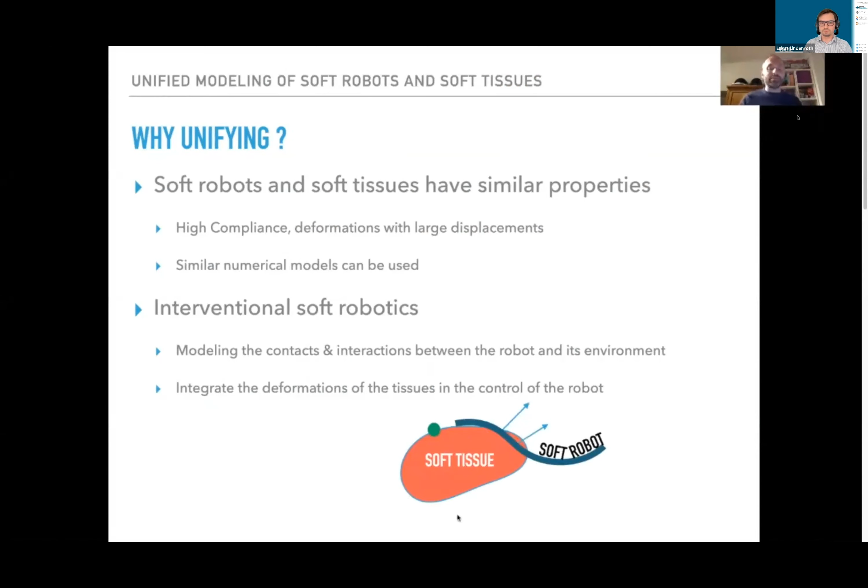So why unify models of soft robots and soft tissues? In fact, they have similar properties: high compliance, deformation with large displacement, and similar numerical models can be used. In interventional soft robotics, we would like to model and interact, to have a model of contact and interaction between the robot and its environment. When we want to drive a robot inside a soft environment, particularly when it interacts with soft tissue, imagine we have a target on these soft tissues. We may have some contact with these soft tissues, so we need to integrate the model of deformation of soft tissues into the model of the soft robot.

My background also reflects that unification. I've been working for several years on eye surgeries, on surgical simulation for training. For instance, here you see in this video the model of the eye made of a finite element model, and here you see more recent work on the inverse model of the soft robot, also made with this FEM model computed in real time.

So when we model soft bodies, for instance here we want to model the liver. The first part is to have a constitutive equation. We need to take some part of the soft tissue, do some tests to obtain the constitutive law, and create a numerical model. We often use in the team a FEM type of model. This FEM model will provide internal force.

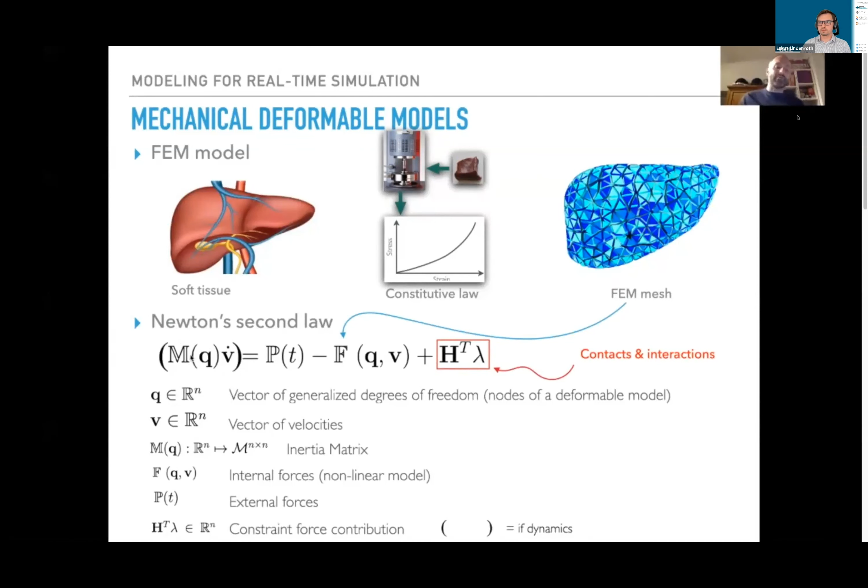We add also some constraint type equations, using Lagrange multipliers, to model contact and interaction. If we are considering dynamics, we need to add this part, which is the mass multiplied by the acceleration, and P is the known external force.

If you think of a soft robot now, it's the same kind of equations. You still need a constitutive equation. So for instance here we did some tests on silicone, and we also use a numerical model of the robot. We have the same thing, we compute the internal force, but for the constraint part, we can also use it to model the actuation, so cable or pressure.

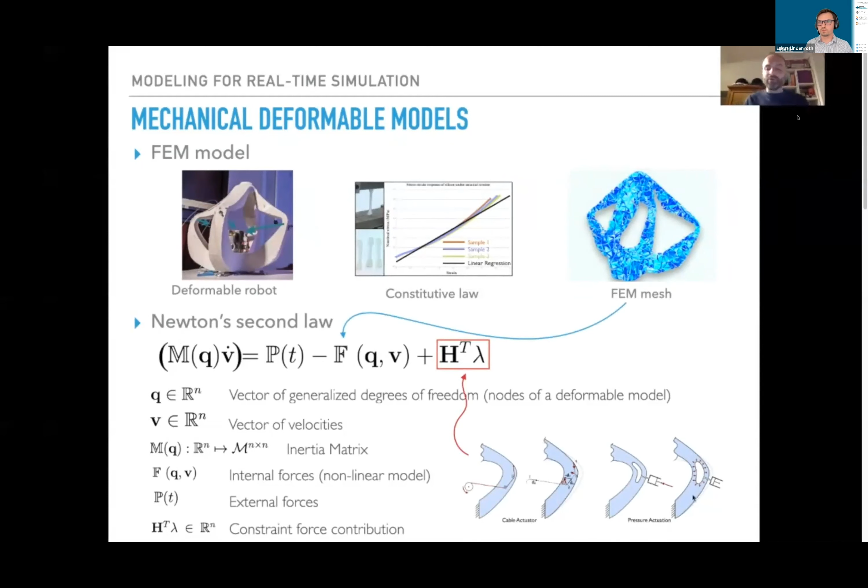For the time integration, we often use a time-stepping method to model, to be compatible with contact modeling. As you may know, at the time of contact the acceleration is not defined, so we prefer to use a lower order integration scheme, which uses the difference of velocity instead of acceleration.

And the time step is there, and here we use impulse instead of force. We perform one linearization per step. So here we have nonlinear deformations, and we have to linearize this deformation at every step of our simulation.

So what you have to recall for the following is this matrix system, AX equal to B. A is a known matrix, B is a known vector, and you have to invert the system to obtain X, the deformation, or the motion.

It's the same kind of equation in the dynamic equations or in the quasi-static case. And you have the constraints here and here that appear in the equations. This formulation is completely compatible with rigid body dynamics. Actually, this time-stepping scheme has been taken from a paper dedicated to rigid body dynamics.

So when we want to model interaction, we have to define the constraints. In the contact case we have two different constraints. Either we are in contact and the distance between the objects at the point of contact is zero, and then the force is positive. Or we have a non-null, positive distance between the two objects, and in that case the force is zero. That's why we say the Signorini law is a complementarity - there are two types of constraints.

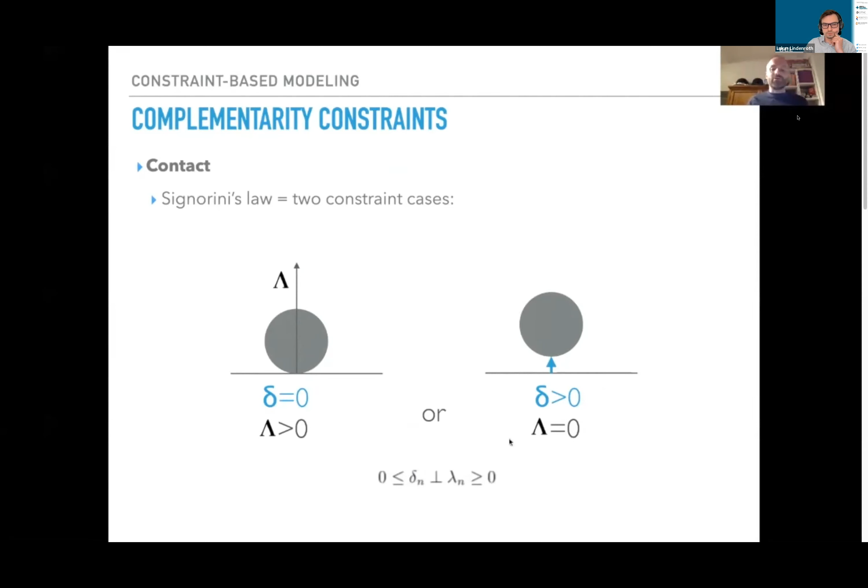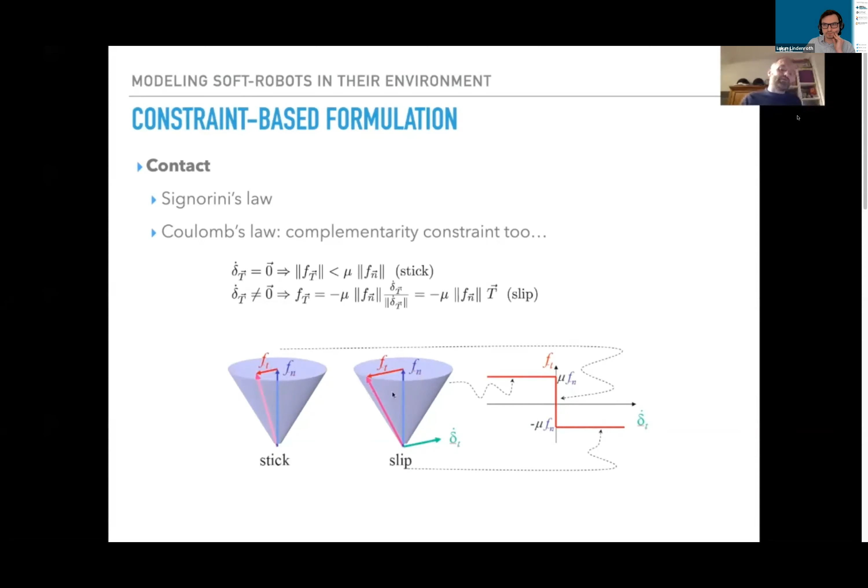Either it's one of these cases or the other. We have the same kind of formulation from the friction. So Coulomb's law is also a complementarity. We have two cases: either we are in the stick case, where we have no relative displacement between the two objects in the tangential direction, and in that case the tangential force is strictly inside the cone. In the slip case, we have a motion between the two objects, and the tangential force is strictly on the surface of the Coulomb's cone.

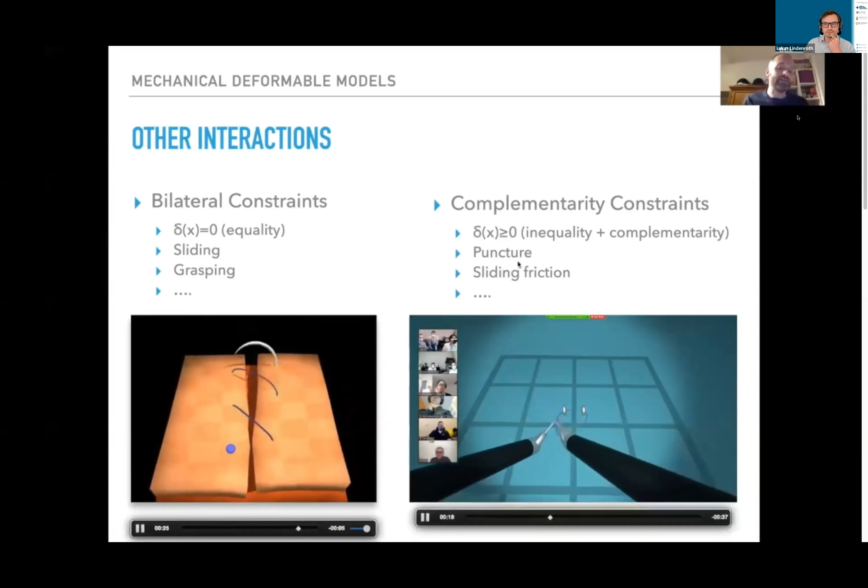With this type of constraints, we can extend the type of constraints to model more and more complex interactions. So we can use equality constraints to have sliding or compute grasping. We can add new complementarity constraints to model, for instance, puncture or sliding friction, which you also see in this video. And here you see a video of a knot that you do for suturing.

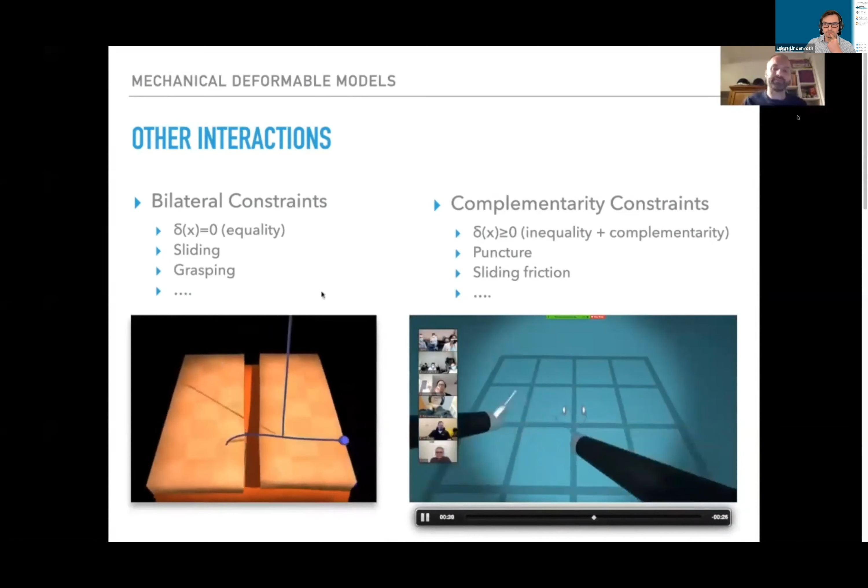So in our framework, what is important is that you have the behavior of the deformable bodies or robots, and you have the constraint law. In our framework, we have a way of constructing this matrix H for the Lagrange multiplier, and their role is to link what's happening at the level of the motion of the nodes and what's happening at the level of the constraint.

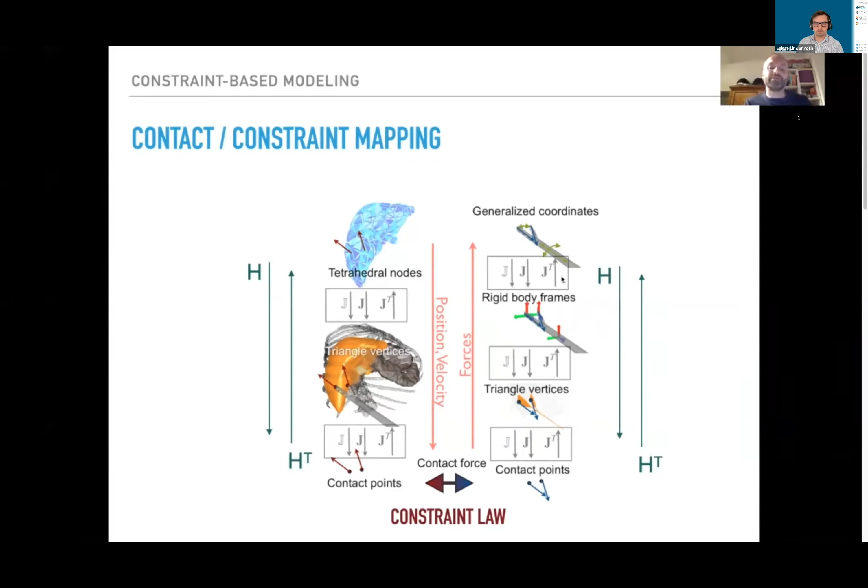So now, how do we handle these equations? Imagine you have a deformable robot in contact with a soft tissue. You have two deformable models for each of the two soft objects, and you have these Lagrange multipliers that we defined before.

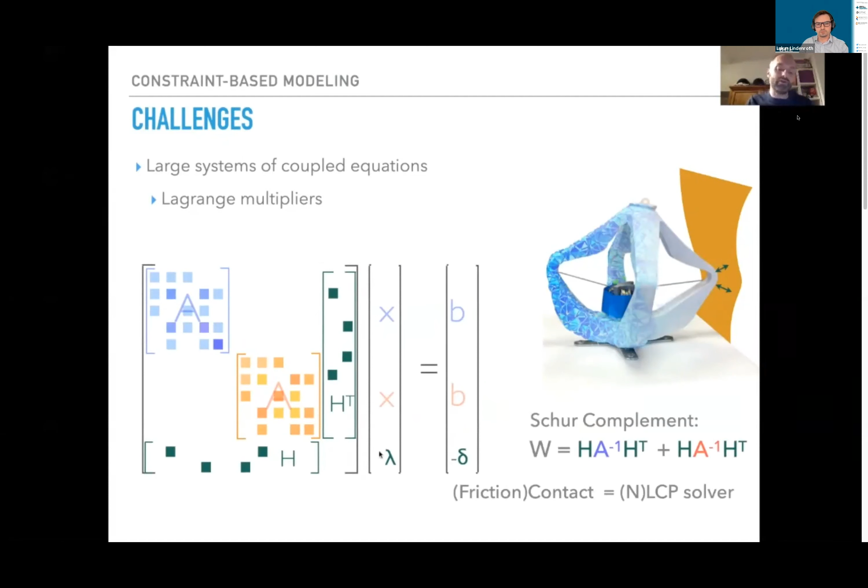Now what we will use in our tools is the Schur complement. The Schur complement of this matrix system allows us to compute the value of lambda, which is also something that is unknown. To understand what this Schur complement represents, I will give you the example of a soft table in contact with the floor.

In fact, W represents the mechanical coupling between the constraints. So in the table example, the four legs are decoupled, whereas here in this other case the legs are coupled. And what you will find when you compute this W matrix, this Schur complement, is a matrix that is like uncoupled, with a block diagonal structure.

So the size of this matrix is the number of contacts. Of course, if I have friction, I have 3 constraints per contact. So it will be, for instance, a 12 by 12 matrix, with 3 by 3 blocks that represent the contacts of the 4 legs. In that case, the 4 contacts are decoupled, whereas here the 4 friction contacts are coupled by the small coupling that we have between the legs.

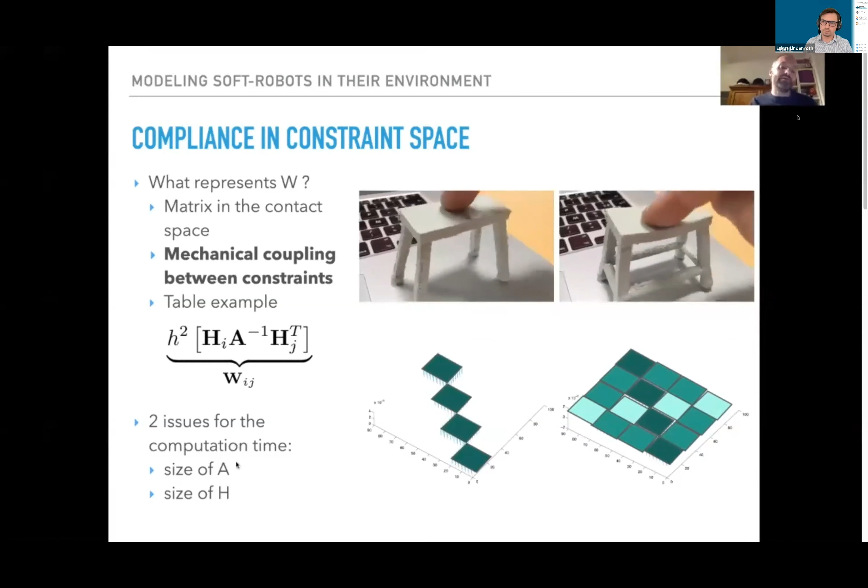And it's really important when you solve that, because in that case you will find that the solution is that we are in a slip case, as here we are in the stick case. There are 2 issues to compute this W matrix: the size of the A matrix, because we have to invert or pseudo-invert this matrix, and the size of H.

And now, what's happening when we want to control a robot with contact? So first, how do we control the robot?

Instead of using the contact here, I'm using another kind of constraint for the cable and for the effector. For the cable, imagine that you have a cable that goes through the structure. You can say that lambda is the pulling force, but as you know the pulling force, you know the distribution of the force on all the points on which the cable goes through. So you can create one constraint per cable. For instance, here we have a robot with 8 cables, so we will have 8 constraints.

And at the tip of the robot, we will define 3 complementarity constraints that represent the effector. So for these constraints, the H matrix is really simple. It's basically a matrix full of 0s, except at the nodes that are concerned, where you have the identity matrix on this node.

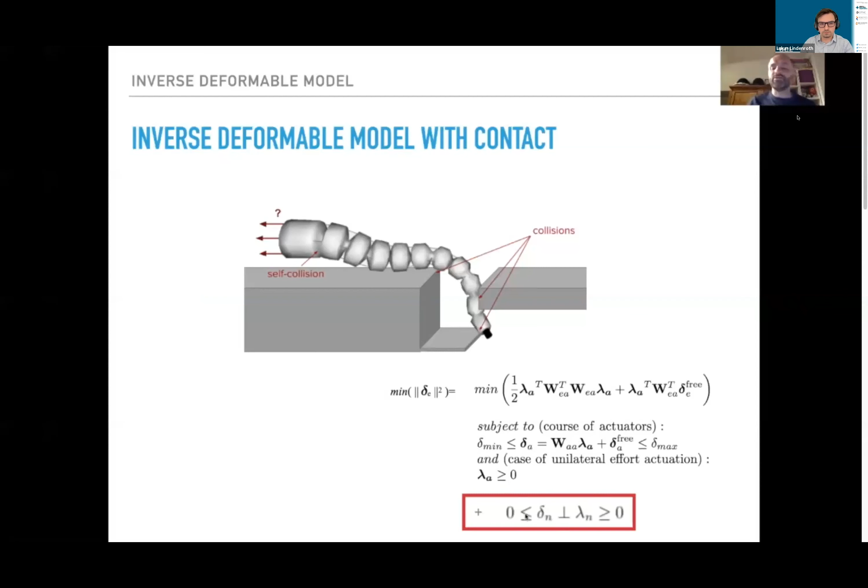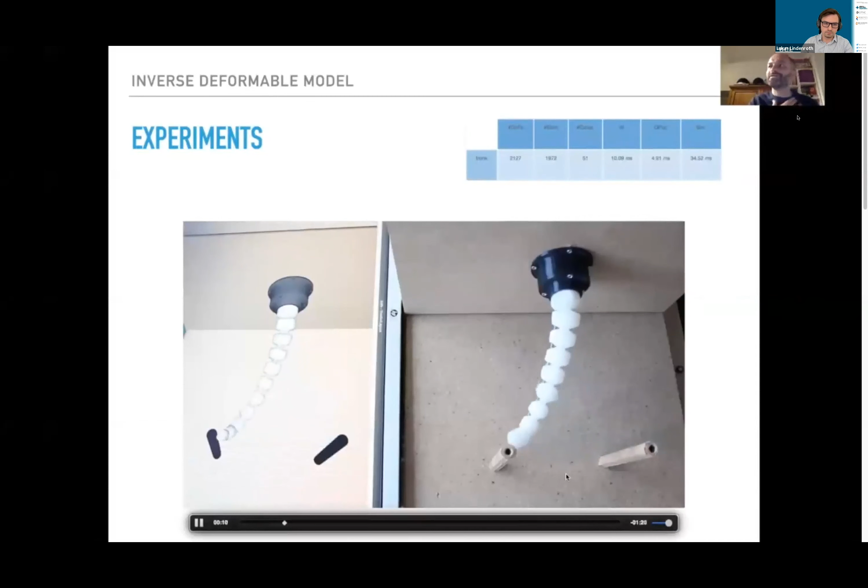And what we have done, which was a little bit more tricky, is to be able to inverse the model with contact. In that case, what was more difficult was to combine this inverse model with the complementarity constraints that are due to the contact. But we ended up with a solution where we were able to have the solver solve a QPCC, a quadratic problem with complementarity constraints.

In this example, you see that if we do not model the obstacle in the inverse problem, we have a difference between the position, so what should be the inverse model of the robot versus what happens in practice. But if we are able to track the obstacle and model its behavior, we will be able to integrate the contact in the inverse model. That's what we do here.

Here we model the obstacle in the simulation. You see that computed contacts are found between the robot and the obstacle, and we are able to change the control of the robot, to adapt the inverse model, to really reach the target here, even if there are some contacts.

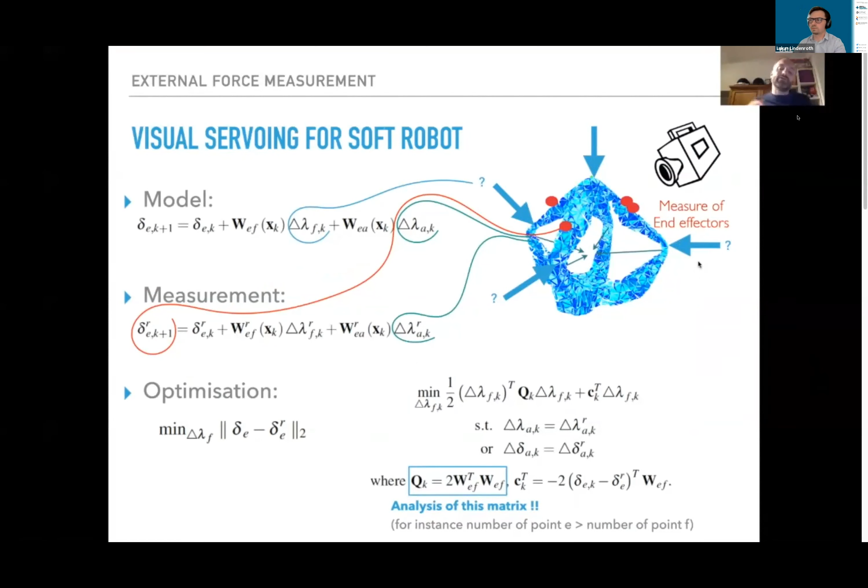We can use this also to do some contact force measurement. So if we imagine having a camera measuring the position of this point, we can also use this inverse problem thanks to the measurement we are doing. In that case, we can add new constraints for the force that could be applied on the robot, and basically the inverse problem finds the external force we are applying on the robot.

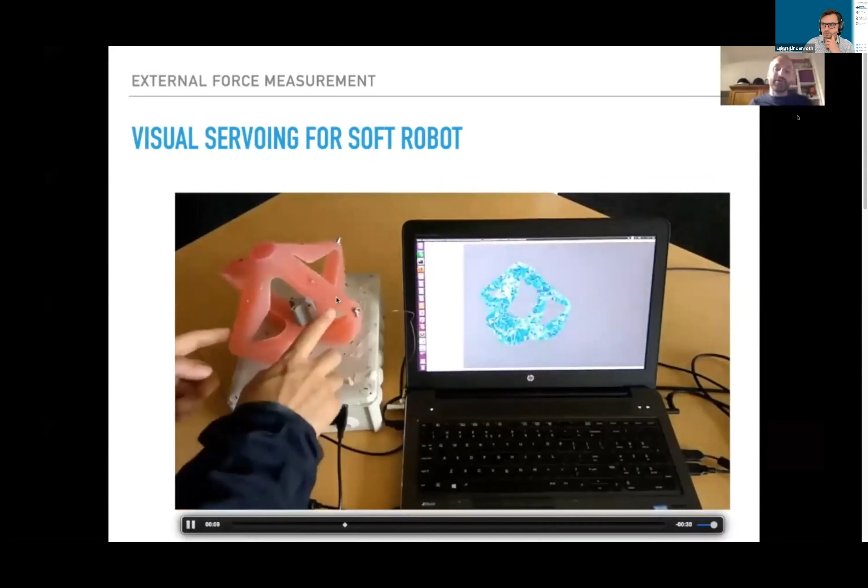So the same kind of equations. When we push on the robot, we see that we can also inverse the problem and find the force that is applied on the robot.

We have combined that with other types of sensors. For instance, here we are using a capacitive sensor to find where the user is pushing on the touchpad. We can use also this capacitive sensor on the soft finger here. You cannot see them, but they are placed on the finger, and with the capacitive sensor, we know where the user is applying force.

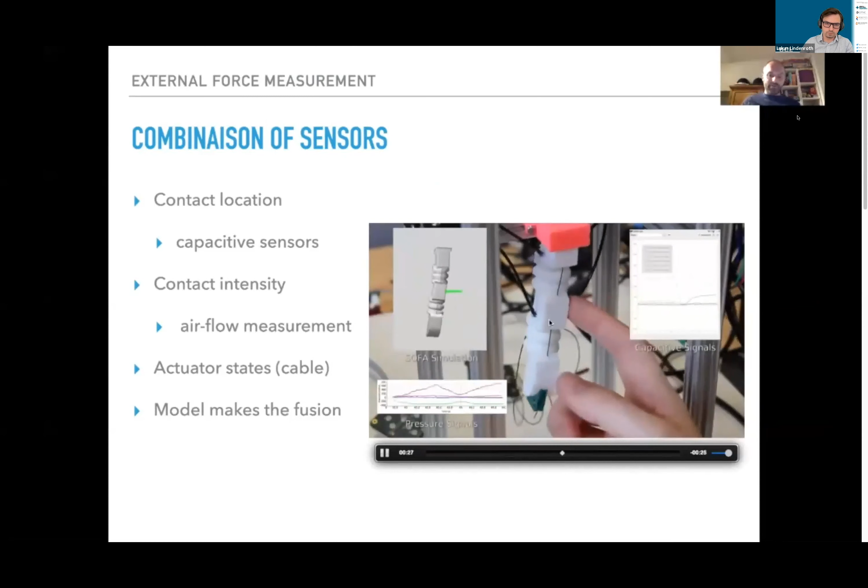And we have also pressure air measurement. In that case, there is no control with camera, etc. It's only based on airflow measurement, not pressure, plus capacitive sensor. And we integrate that with the model to find the force that is applied on the robot.

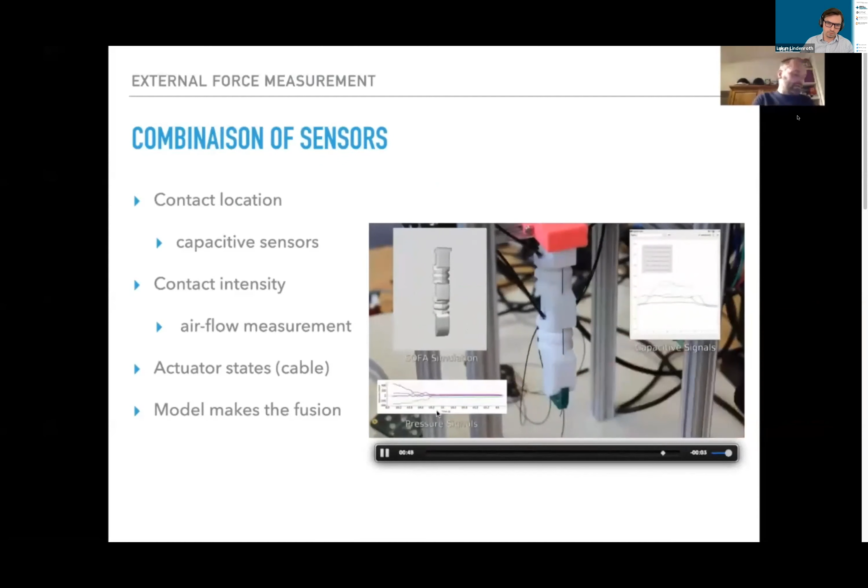So we can transform the robot and make it act as a force sensor.

An example of application mixing this soft robot and soft tissue models is the Bartolo project that we do in collaboration with Ficuciello. It's a robotized prostate biopsy. We have soft tissue that are modeled based on the MRI.

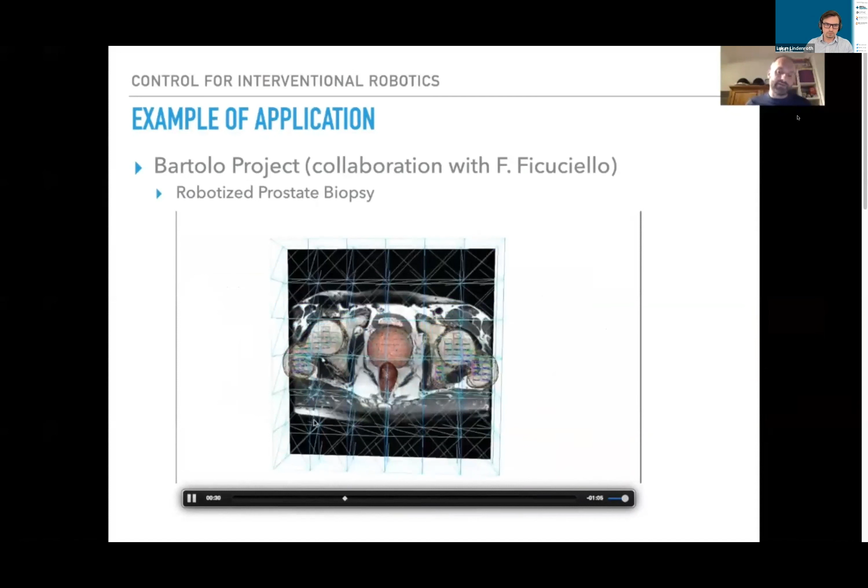You can see the deformation of the tissue. This model uses FEM also, and you can see that when we deform the organ, we can also deform the image. Basically here it's not a soft robot, but a rigid robot equipped with a soft part, a soft cylinder. It's a kind of soft robot because this part is soft.

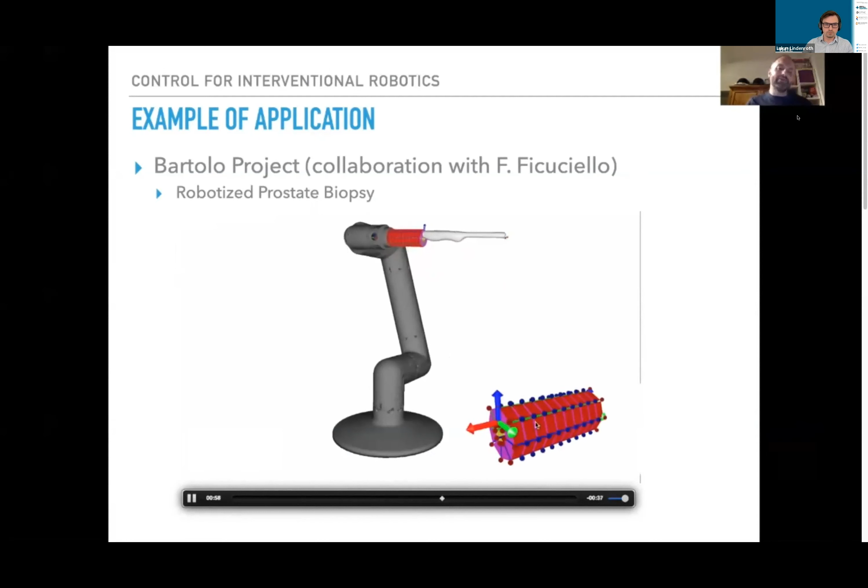What we really want to do is inverse a model to really be able to put the probe to do the biopsy exactly where we want. So we put a target of the biopsy on the prostate.

Here you see the target, and we use the inverse model to really align the probe just in front of the target. If we move the target, the robot will automatically adapt its position in the inverse problem.

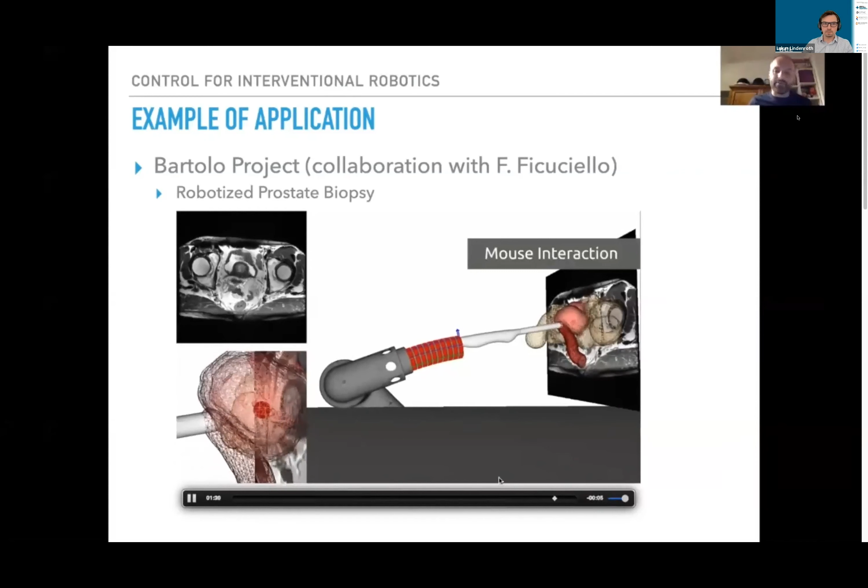Now we are working also on how to optimize the design, in particular sensing, for this problem of soft robot in contact with its environment.

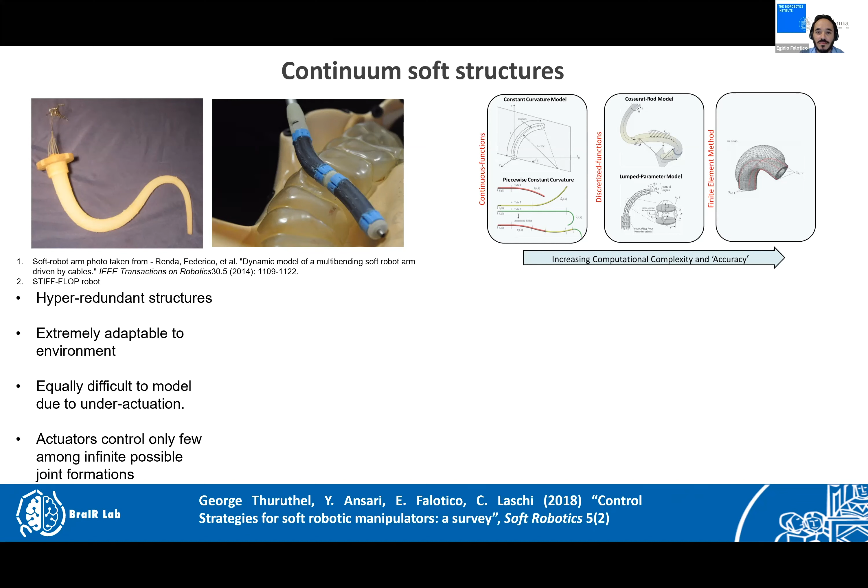For this reason, given this difficulty in modeling, we decided to actually try to follow another path for the control of this kind of robots, that is, to use learning-based approaches. I'll try to show in this presentation what we have actually achieved in this.

So why do we believe that a learning-based approach can be an optimal solution for the control of this kind of robot? If we look at the different control spaces we have, starting from the actuation space, moving through joint space and configuration space, where you have, for example, the arc parameters, and finally you can get the position and orientation of the end effector. Of course, all these spaces may require transformations that can be quite expensive from a computational point of view.

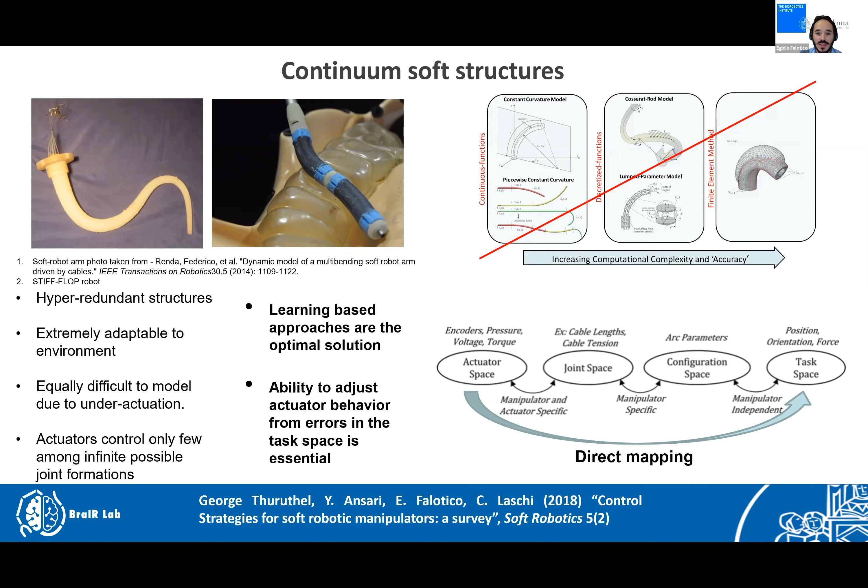So we tried to create a kind of direct mapping between the actuation space and task space. I'm going to present results for controllers that are static or dynamic.

Let's start from what we consider a kind of seminal work. This was done by our lab in 2015, and the idea was to make a comparison between a more classic robotic approach, a Jacobian-based inverse static controller, and another one based on a feed-forward neural network, a simple neural network that could learn the mapping between the end effector position and the cable tension. Here we considered a model of the octopus arm.

The results were interesting. What we got is that, in simulation, the Jacobian model was way more accurate. But when we moved to the real robot, due to uncertainty also in the manufacturing, the Jacobian method had some error, and the feed-forward neural network performed better for the control of this kind of robot.

After this, we were part of this European project called iSupport, whose goal was to support mainly elderly or impaired people in the bathing task. The idea is to provide people help during, for example, showering.

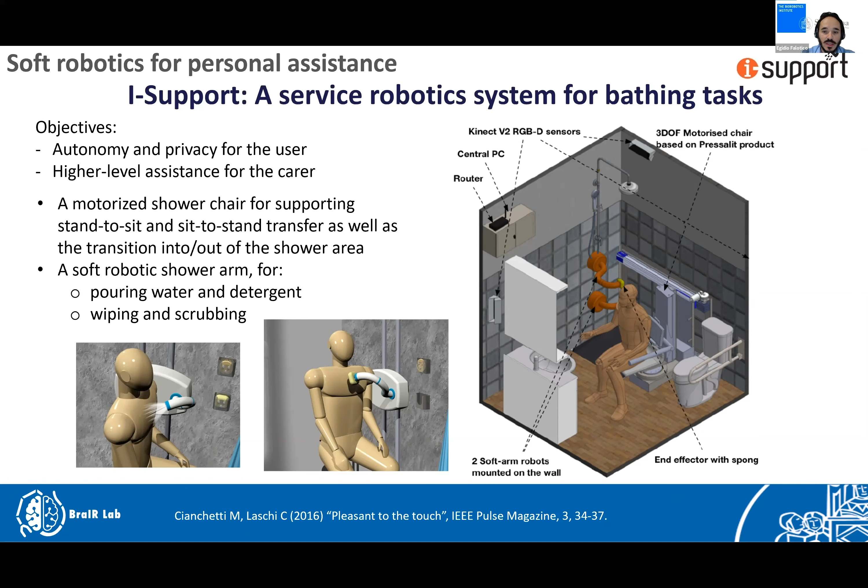Our group worked on the design of the soft robotic shower arm, and this was the solution that we proposed. This robot was composed of 3 modules, as you can see, and also had the possibility of exchangeable end effectors according to the task that was supposed to be done by the robot itself.

We have 3 identical modules, and each module is provided with 2 kinds of actuation: pneumatic chambers, 3 pairs of them in particular, and also cables. The joint effect of cable and pneumatics could actually allow us to regulate the stiffness of the robot.

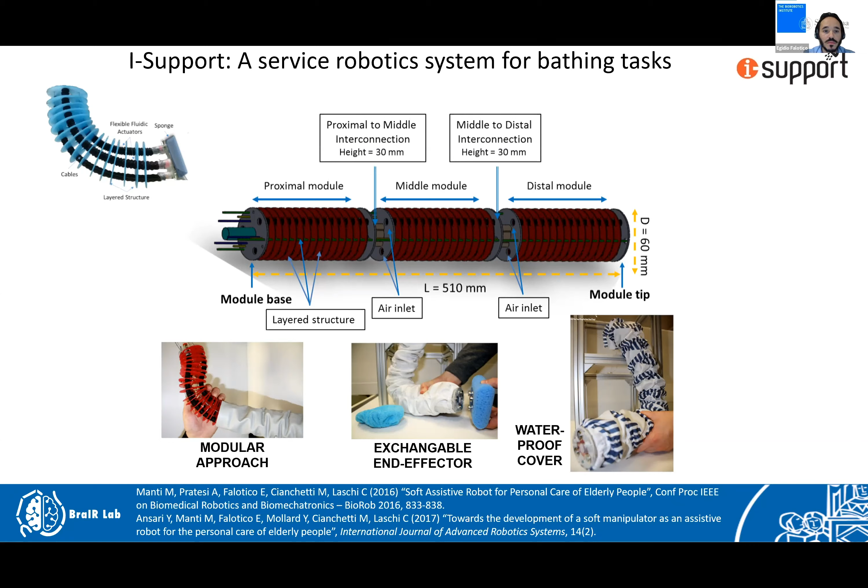As a first solution for the control of this robot, we came up with a new neural network, with the idea of controlling the robot from a kinematic point of view. We extended the previous work I showed on the octopus arm, and made this new neural network, which is again a feed-forward neural network.

But what we added was that we tried to learn a new mapping between the input and output of the neural network. Here we considered not only the current configuration of the actuation space, but also the current and previous configuration of the end effector space. The idea is that the neural network could provide the next configuration for the actuation space, so in a way it's learning the differential inverse kinematic model.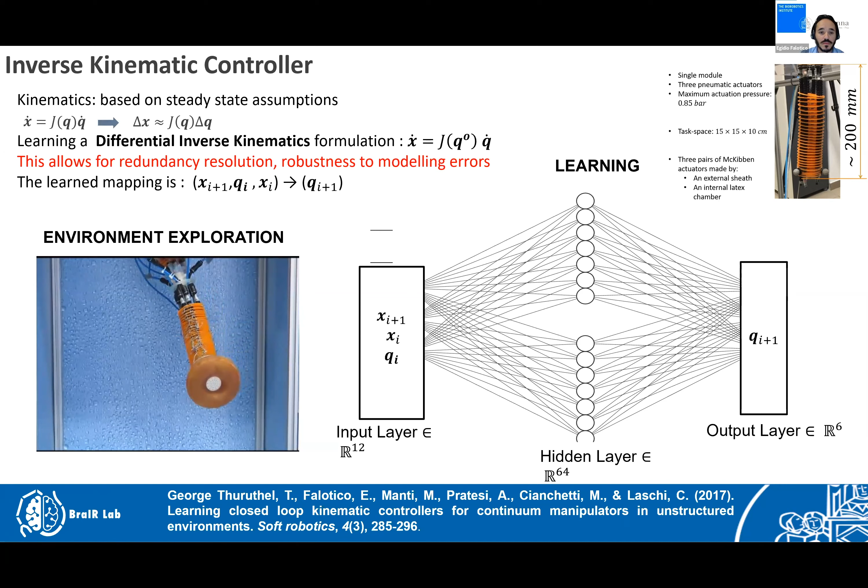We are able with this neural network to control the two modules of our robot, as you can see, doing different tasks from line following, but also we demonstrated that it was possible to do disturbance rejection when we moved the robot. This was possible because we used feedback based on a magnetic sensor. We also demonstrated the robot's capability to follow obstacles, but this was mainly due to the morphological properties of the robot itself.

We also extended the controller to consider, for example, the orientation. As you can see here, the robot is able to follow a line in space while keeping the orientation fixed.

We extended this model since we were supposed to also have an interaction with the subject, for example when we want to perform the scrubbing task. The idea was to control not only the position but also the stiffness. To do this, we proposed a new learning algorithm based on reinforcement learning that could perform a multi-objective optimization, so not only the position but also the stiffness. This meant we could find, for the same position, the configuration of the robot with greater stiffness, thanks to the reward matrix we gave to the reinforcement learning algorithm.

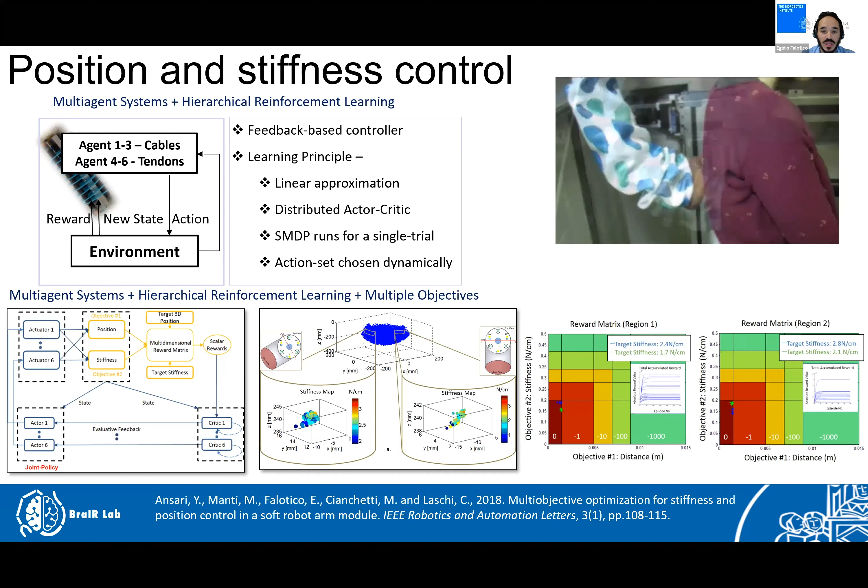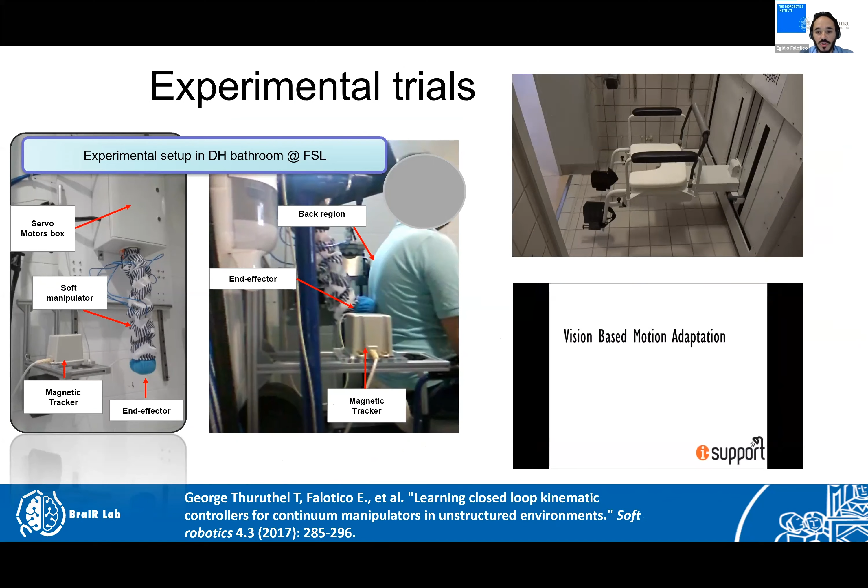One of the trials we performed, for example, was the washing task, where the robot was controlled, and we integrated our controller based on the neural network with a visual system, allowing the robot to follow the movement of the subject during the task itself.

After this, we realized that while we were able to control our robot for kinematics control, we wanted to extend this to exploit more of the robot's capability from a dynamic point of view. For this reason, we started thinking how we could design a dynamic controller, and we followed a specific approach, starting from learning the forward dynamic model of the robot.

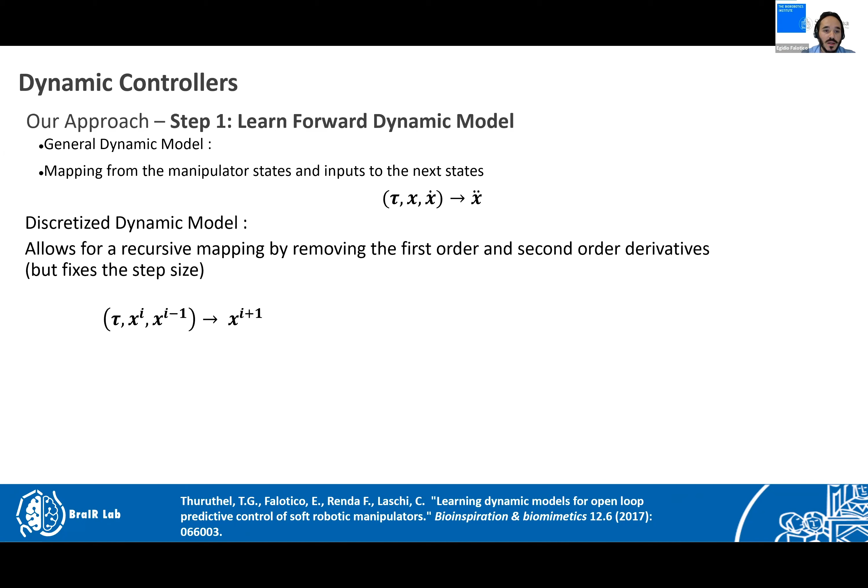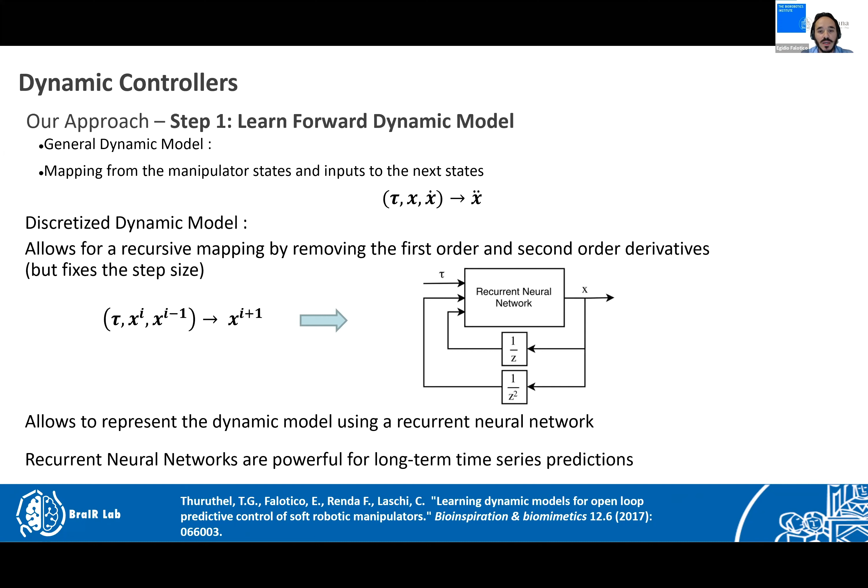This means we were able to learn a mapping between the actuation, current state, position, and velocity of our robot, and predict the acceleration. We discretized the model, allowing for a recursive mapping where we used previous values of the end effector position to predict the next state of our robot. This was possible thanks to a recurrent neural network, where we backpropagate the value predicted by the network itself to get an estimation of the previous values of the end effector position.

We also set up a trajectory optimization method for open loop control, using the classic sequential quadratic programming approach. With this method, we applied it directly on the neural network derived from the robot itself, so we could generate the trajectory at actuation level that would allow, for example, following a path at the end effector level.

When we consider the dynamic workspace of the robot compared to the static one, it increased a lot, since now we also have inertia during the movement, allowing a bigger end effector space. This also reduced the time needed for sampling, because since it is moving dynamically, the sampling took only a few minutes to collect the data needed to learn the forward model.

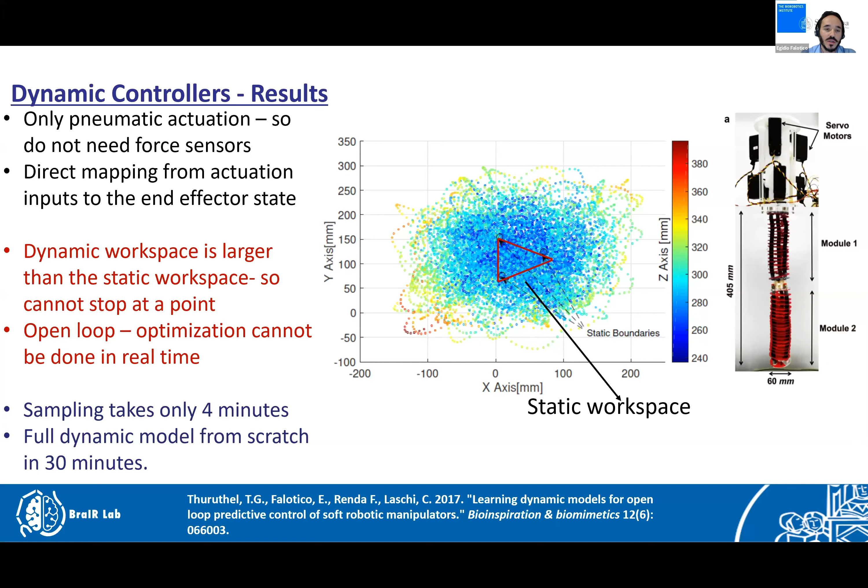Here you can see, on the left, the sampling, how we move the robot randomly to let it explore the environment. After the learning part and applying the optimization, we were able to generate a circular task or a spiral one, just by changing the provided trajectory and letting the optimization method compute the new trajectory at the actuation level.

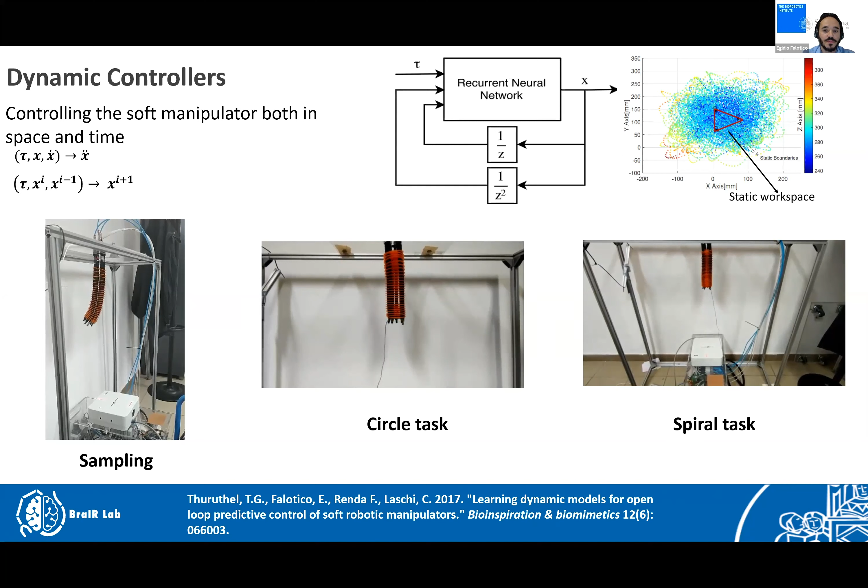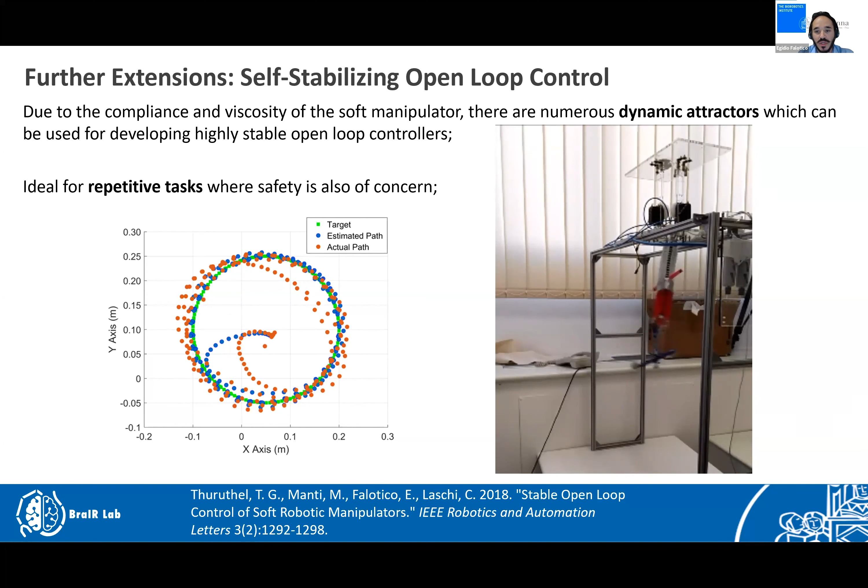We also found that when we implemented this model, thanks to the compliance and viscosity of the soft manipulators, there are dynamic attractors that could be used for developing a highly stable open loop controller. As you can see in the video, when we disturb the robot, even though the controller is open loop, it is able to go back to the initial circular trajectory without any feedback to the robot. This shows a self-stabilizing property of the robot itself.

So we started wondering how this was possible, since we did not apply a bio-inspired control. We decided to change several configurations in our simulation.

So for example, we changed the body stiffness, we modified the density of the medium to understand what was actually making that invariant profile. What we found out is that when we modify the stiffness, or the density of the medium, the invariant profile is no longer there. But this does not happen if we change the configuration of the robot, for example using 4 actuators instead of 3, or only 2 actuators and the base instead of 3. So actually what we derived was that it's the morphological and environmental properties that affect the observed invariant profile.

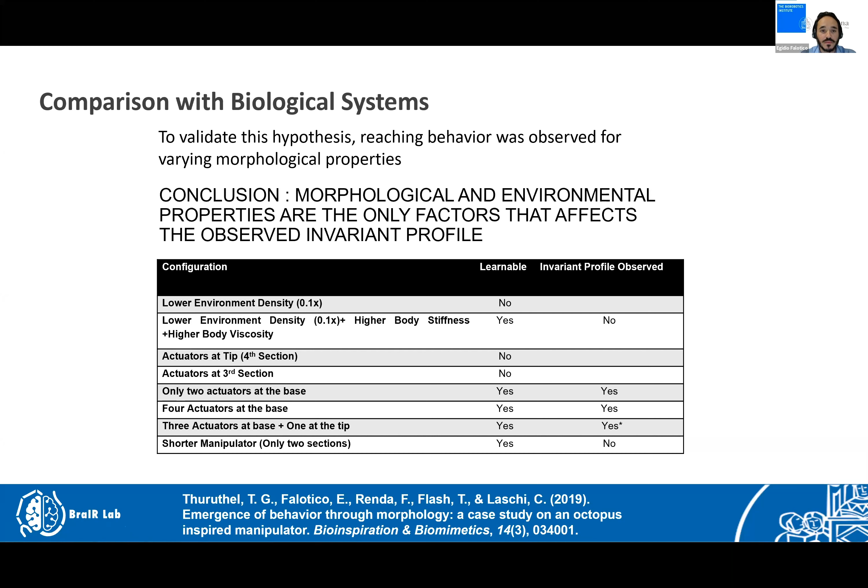So let me conclude my presentation. What I can say is that, of course, model-free approaches so far demonstrate to be a suitable solution for the control of soft continuum systems.

And I believe that for manipulation in an unstructured environment, which should be the next natural step, if we consider that we've developed different models but have not had real interaction with the environment, we still believe that model-free methods can show promising results. Of course, a hybrid approach that could use model-free and model-based together could be really an interesting line of research, since model-based approaches are now becoming more robust.

And in the end, I want to go back to the last work I showed, where we tried to replicate animal strategies. I do believe we should try to get a better understanding of how these strategies are made, in order to generate more elegant strategies also for the control of soft robots.

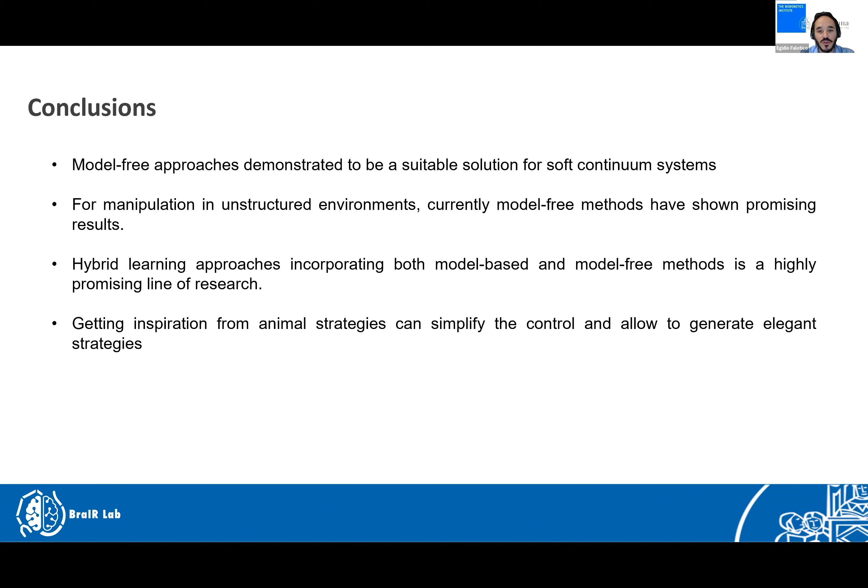Thank you so much, Egidio. That was really, really impressive. Particularly the results from your dynamic model were really, really good.

So if you now think about translating that into use cases, into applications, or into clinical procedures, how do you ensure that nothing goes wrong in the real world? How do you make your controller safe, and how do you ensure stability when you're performing procedures that are dangerous to a patient, for example?

Yeah, I mean, of course, the dynamic approach is more attractive, but maybe it's not mature enough for this kind of application. Of course, I would suggest now to rely on static or quasi-static models, which are more robust and maybe also more suitable for this kind of application.

So go slow and be safe, that way. I guess that's a good way of handling that.

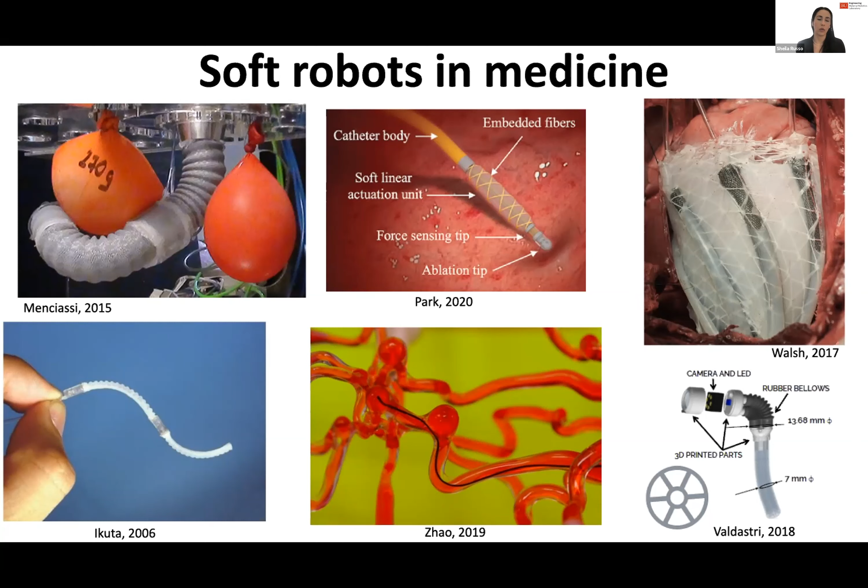The great thing about these robots is that they are made of soft materials with almost the same compliance as human skin, so you can immediately understand why that would be beneficial when interacting with a human body or patient. In my lab, our approach combines different research areas at the interface between surgical robotics and soft robotics.

We combine this together with microrobotics and origami-inspired robotic mechanisms, and we'll see why in a second. We are really interested in the mechanical side of these robots, and we are developing advanced manufacturing technologies in our lab to build these innovative soft robotic systems.

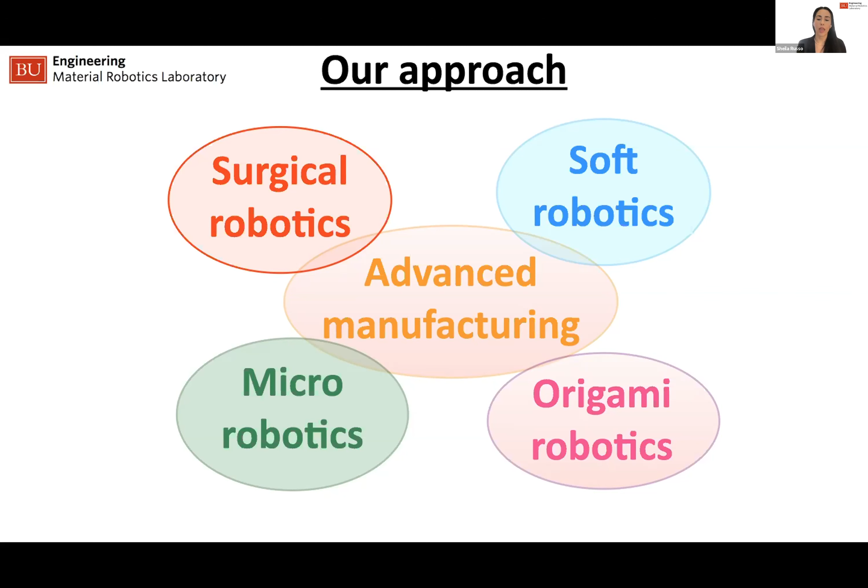Today I want to highlight two classes of soft robots we are working on: hybrid soft foldable robots, which show the interface between soft robotics and origami-inspired robotics, and soft reactive robotic skins. We'll start with hybrid soft foldable robots, and I'll tell you a bit about what they are.

These robots try to combine the best of both worlds: soft fluidic actuation, which is safe inside the human body because the robot uses no electrical inputs, no motors, no rigid components—just soft fluids, like saline solution, used to pressurize the chambers of the robot—combined with soft materials, which we've seen are really safe.

But they also combine the advantages of origami-inspired rigid robotic systems, meaning these robots can be folded down into really compact configurations and take up a small amount of space.

And so they can, for example, be mounted around commercially available medical instrumentation. Think about catheters, endoscopes, navigating inside a complex anatomy safely. And then once you reach the surgical target area, these robots can unfold and deploy at the surgical target and perform significant surgical tasks, such as remove tissue, remove a tumor, perform a biopsy, and so on and so forth.

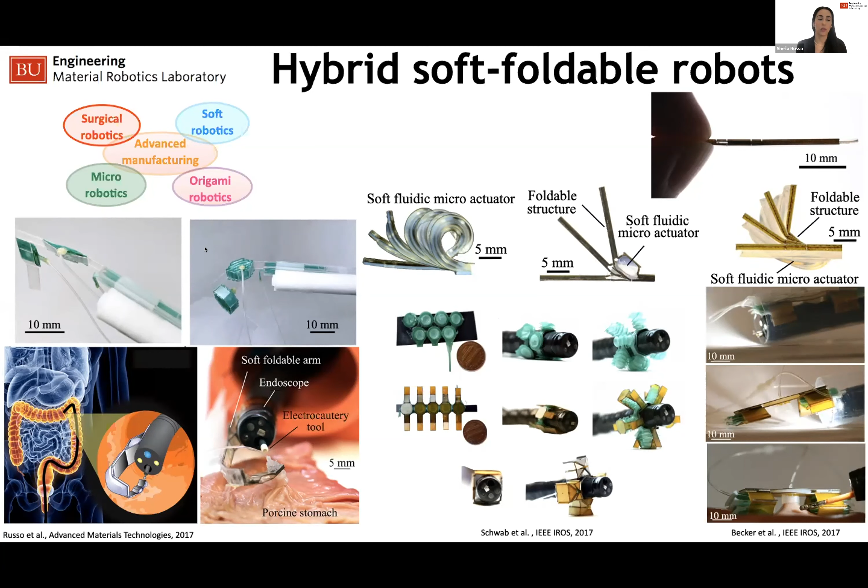These are some examples of the hybrid soft foldable robots that we have developed, but today I'm mostly going to be focusing on this system, which is a robotic manipulator that can be added on to colonoscopes for early stage cancer removal in the gastrointestinal tract.

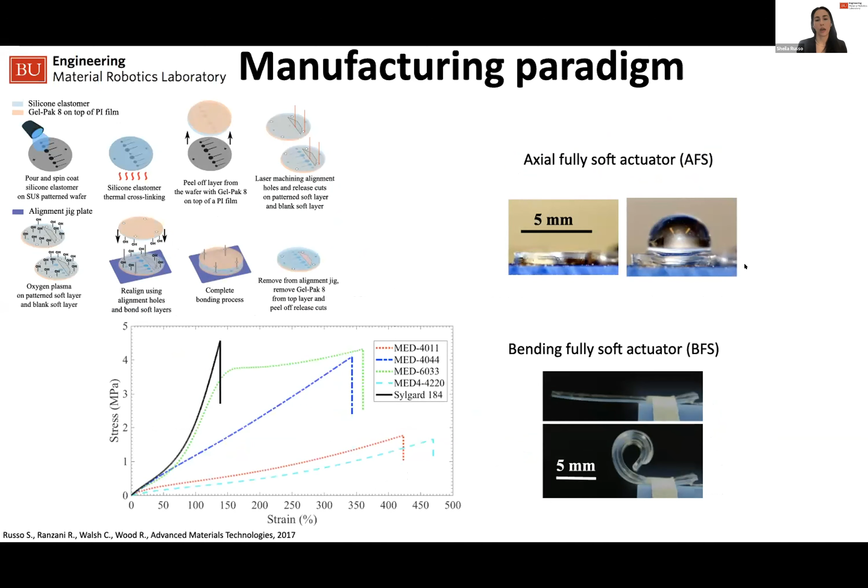This is just an overview of the manufacturing paradigm that we have developed for building these systems. We are basically first manufacturing soft micro-robotic actuators out of soft lithography and laser precision micromachining, combining these two techniques to build biocompatible soft micro-robotic actuators out of materials that are safe inside the human body.

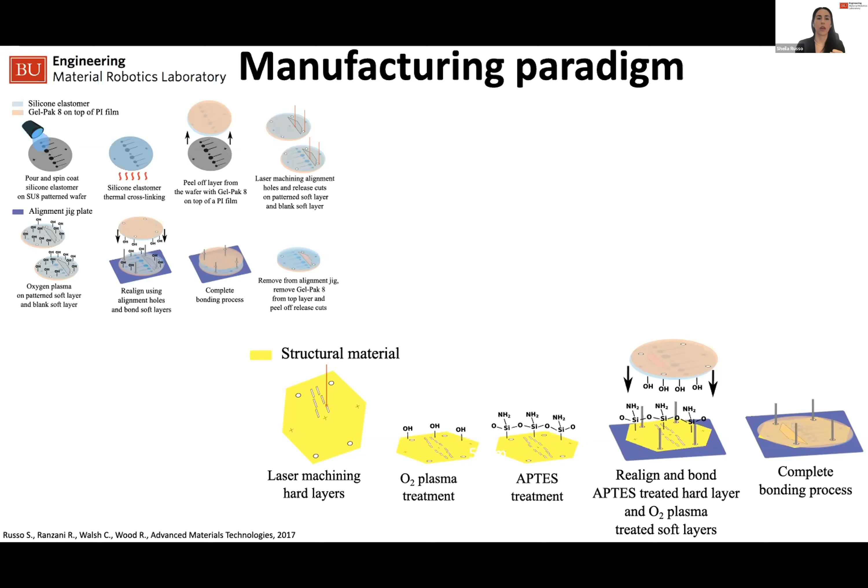And then we take these soft fluidic micro-robotic actuators and we use a process called chemical surface modification to bond soft materials together with hard materials, and a variety of hard materials can be used, such as plastics and metals, conductive and non-conductive materials. We basically create a sandwich of layers of materials, 2D layers, and then out of this sandwich we can laser cut our robotic actuators.

And I want to stress here how thin and small you can manufacture these. Think about integrating this outside of an endoscope or passing that through a working channel of a catheter, and navigating inside, for example, a deep-seated tumor in the brain.

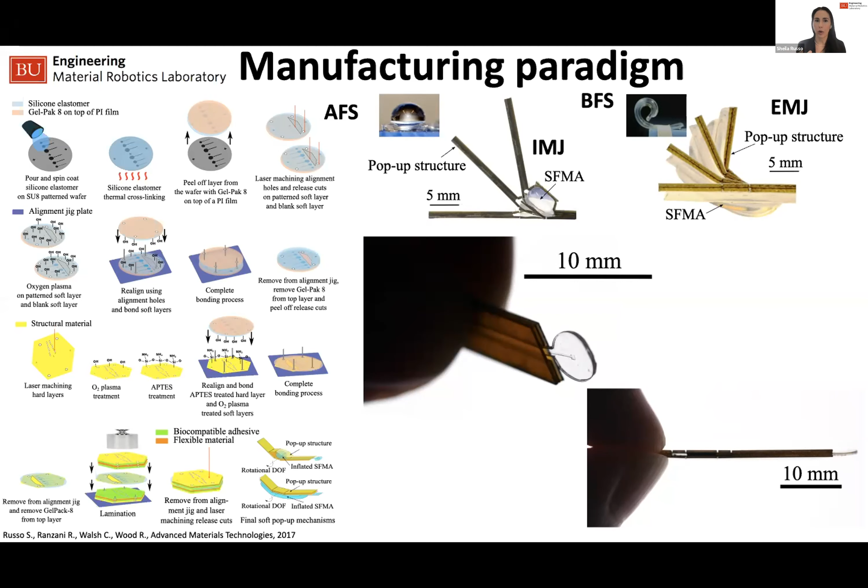And so even though they can be manufactured pretty small, their force and torque and mechanical performance can be tuned, and they are actually much better performing than their fully soft micro-robotic actuator counterparts. And that's combining the best of these technologies.

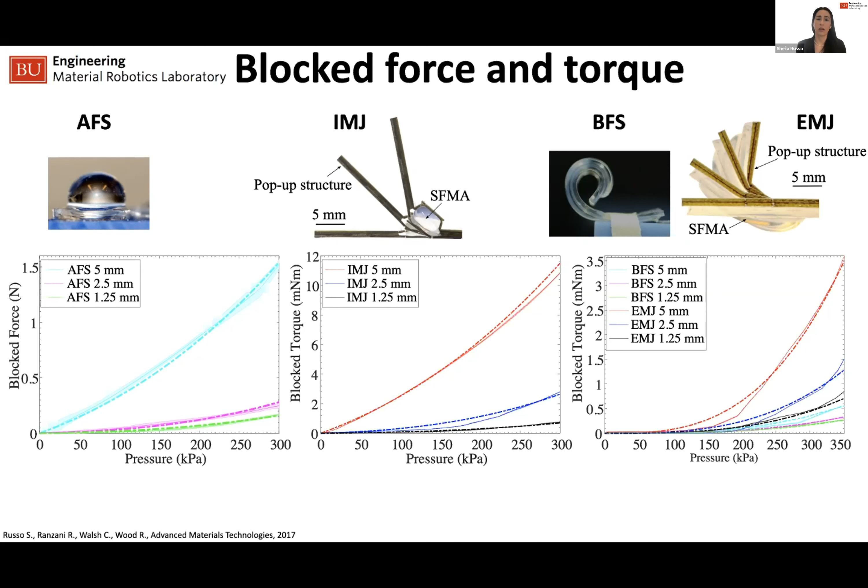Basically you can tune the force that the robot can develop at its tip, but you can also tune the deflection that these robotic systems can have, and so predict a little bit better how the robot is going to be moving, pre-engineer the range of movement that you're going to be needing depending on a specific surgical procedure that you want to perform.

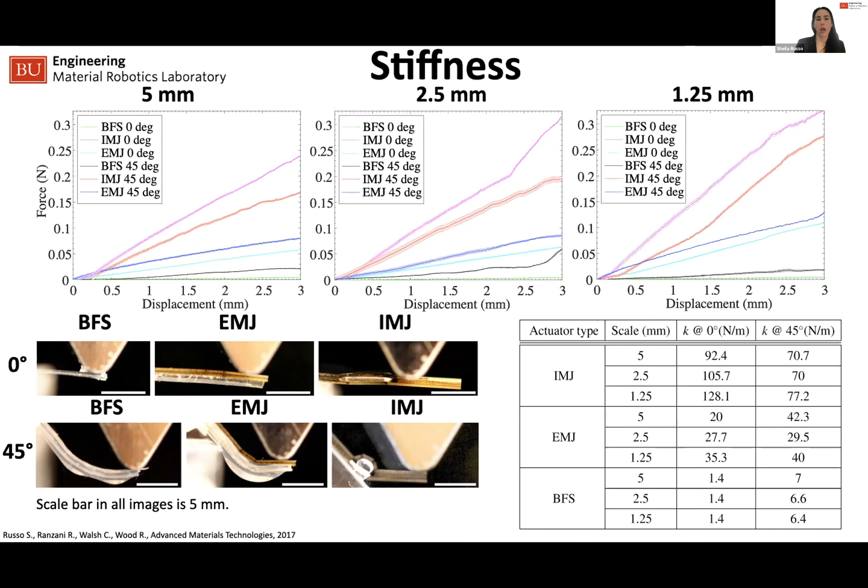Also, the nice thing is that you can pre-engineer where those rigid components will be integrated inside the robot, or you can move them around by using actuators so that you can tune the stiffness of these soft foldable robotic systems. Another really interesting thing is that sensing is really important in robotics.

And it's even more important when you are thinking about inserting a robot inside the human body to perform surgery. You want to know where you are, you want to know what you're doing with a robot, and potentially you want to have some sort of haptic feedback to make sure that the interaction between the robot and the biological tissue you are interacting with is safe.

In this example, I'm showing that we have embedded conductive traces and conductive plates just by playing around with the materials that we can embed in our manufacturing strategy, and we have created a capacitive sensor. So when this soft microfluidic actuator is inflating, these two conductive plates can create this capacitive effect, and we can measure the bending angle of this specific end effector.

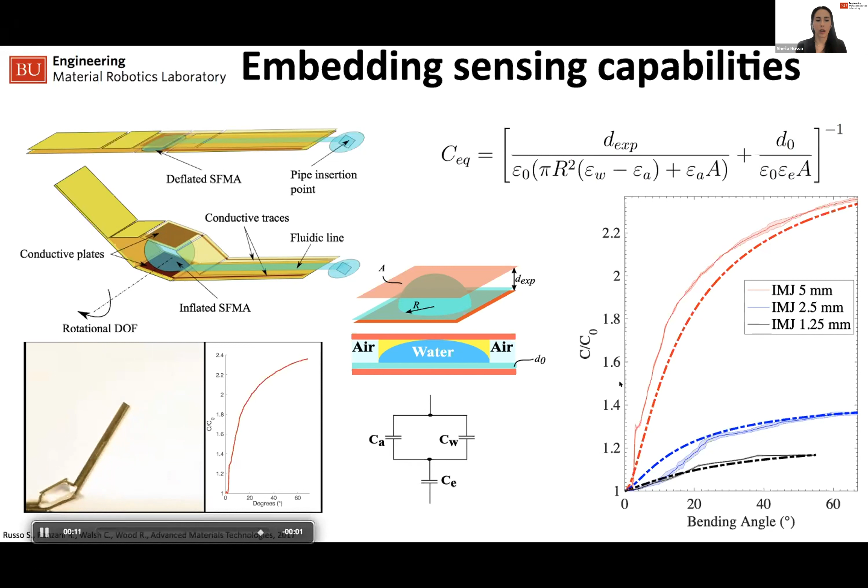You could use this, for example, also to monitor the interaction, the haptic feedback you're having with tissue. I won't go too much into the technical details, but we have analytically modeled these systems both from their mechanical performance and also from their sensing performance. If you are curious, I would recommend checking our paper in Advanced Materials Technologies to learn more about that.

But basically, once we had developed these systems, we asked ourselves, okay, what can we do with that really? What could they be used for? So we reached out to our clinical collaborator at Brigham and Women's Hospital here in Boston, and we went into his lab in the OR, and we started shadowing him in the OR and in his lab, performing ex vivo tests to basically understand some of the specifications of a minimally invasive surgical procedure for early stage cancer removal in the gastrointestinal tract.

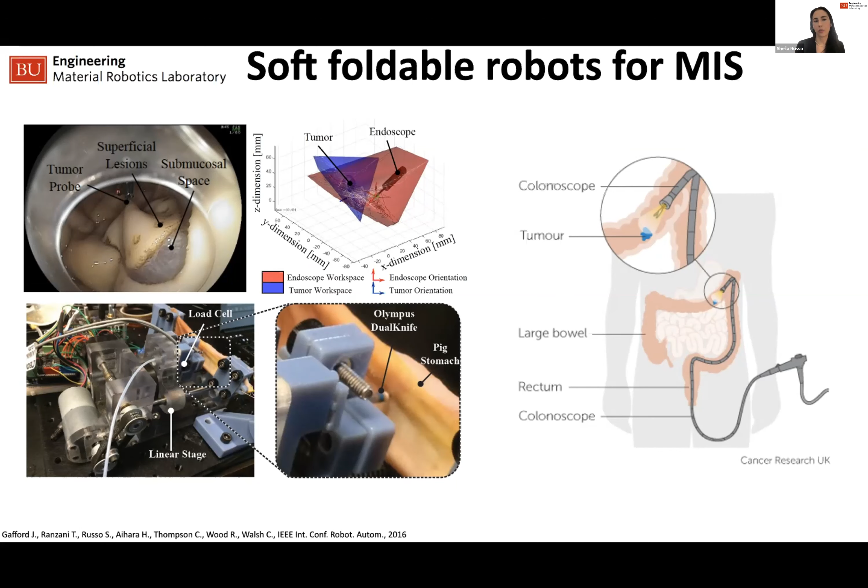And so we instrumented his tools with sensors and so on to measure workspace that is necessary in this kind of procedures, and forces and so on.

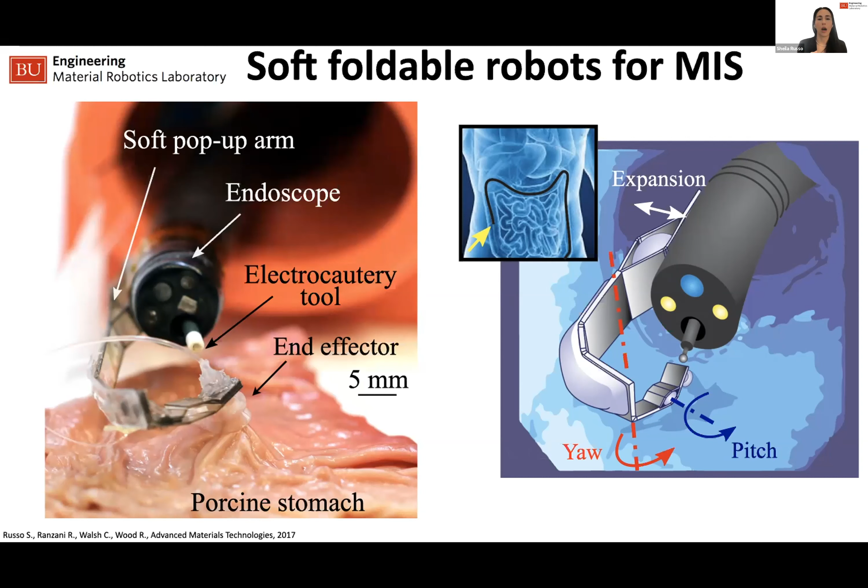And we engineered a solution to this problem, because basically endoscopes don't have distal dexterity and sensor feedback and so on. So we augmented the capabilities of the colonoscope by creating an add-on, mounting a soft foldable robotic arm around the periphery of the colonoscope to add 3 degrees of freedom and manipulation capabilities of tissue, such that we could perform biopsies and tissue removal.

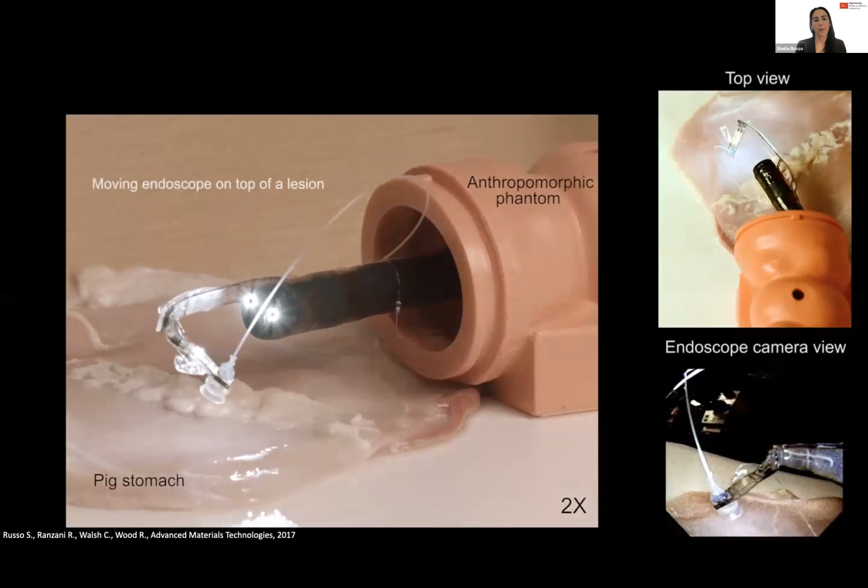This is an ex vivo test, meaning we used porcine stomach to validate our platform. Here you can see the robot mounted around a colonoscope basically grasping onto tissue. We have a miniaturized vacuum-based soft gripper at the tip of the robotic arm as end effector.

And when we apply vacuum, the system is able to retract tissue, meaning pulling the tissue up, such that we could then go through the working channel of the colonoscope and remove this part of the tissue, where if there was a lesion here, we could remove it and analyze it in case this was a cancerous lesion.

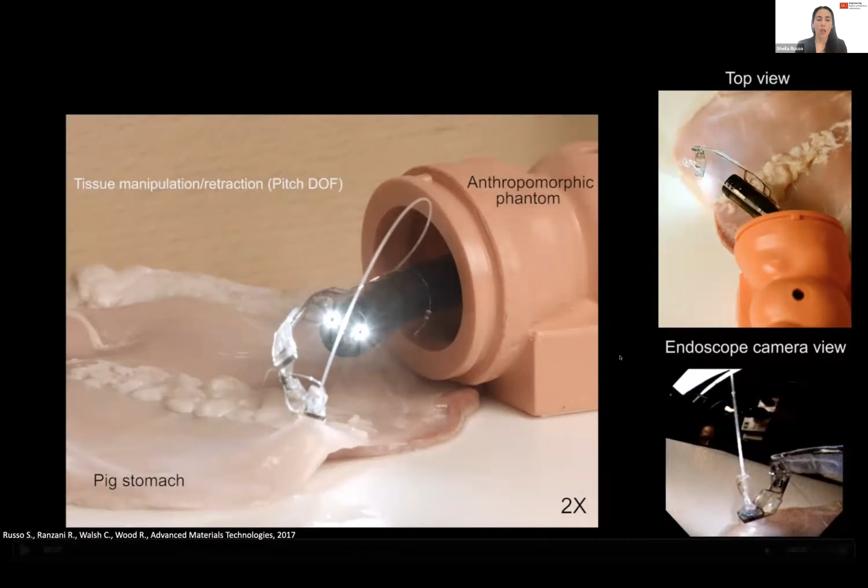Switching gears to the second part of the talk, I'd like to talk about soft reactive skins. Think about sleeves or skins that could be manufactured really thin, and you could mount them around already existing medical instrumentation to augment the capabilities of colonoscopes or catheters or other traditional rigid tools used in surgery. These skins have a combination of sensors and actuators such that they can be reactive.

So they can return haptic feedback to the surgeon, telling them how much force they are exerting onto tissue, and then potentially deploy soft actuators to lower those forces down.

This is particularly useful in a scenario such as colonoscopy, where because patients are typically sedated, there is no return haptic feedback, especially for novice surgeons learning the procedure.

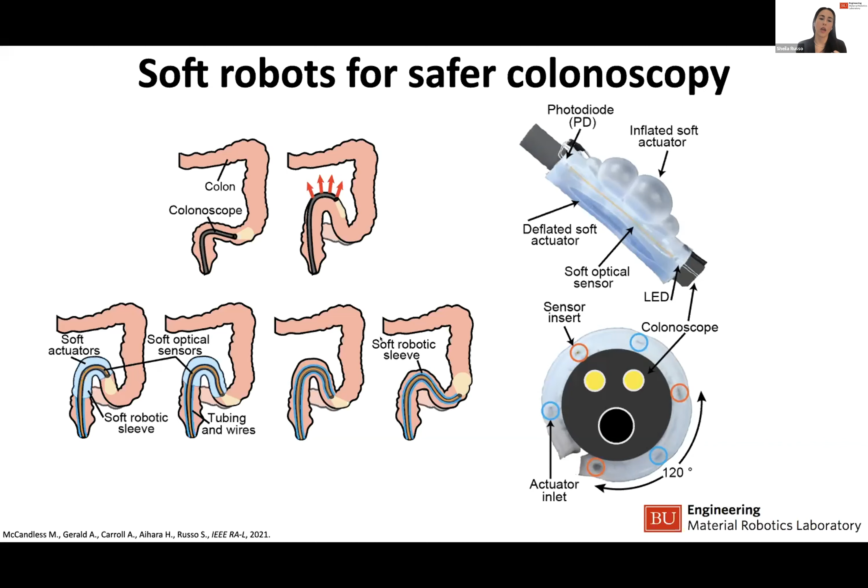It has soft optical sensors that can detect these high forces and automatically deploy a sort of airbag that can help with the navigation of the system and advancing the colonoscope in the colon up until the cecum, which is the last segment of the colon.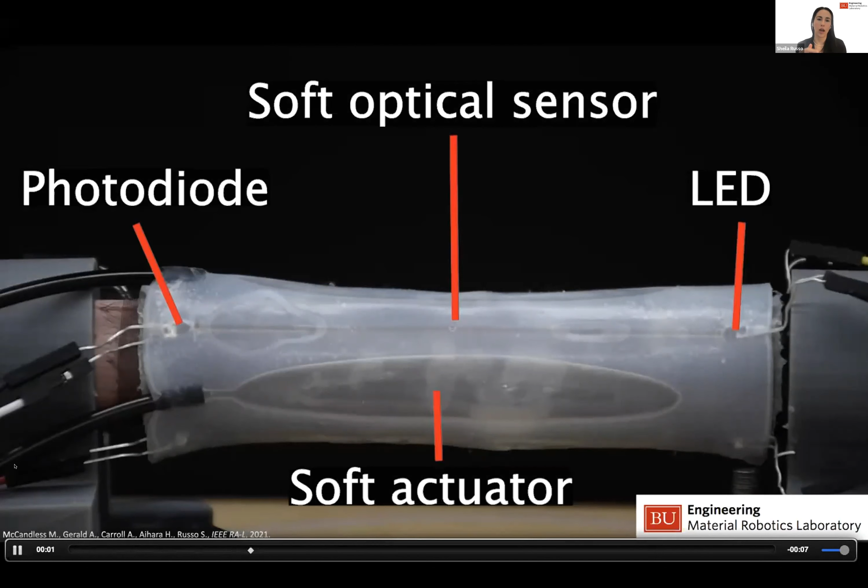This is just an overview, a quick video showing you how the system works. So you have those soft optical sensors, and as you press onto them, these soft robotic actuators will deploy.

We have created a simple graphic user interface for our clinical collaborator to use, through which they can control the inflation or deflation of those soft robotic actuators, so that if they deem it necessary, they can deploy them to help with navigation tasks at any time.

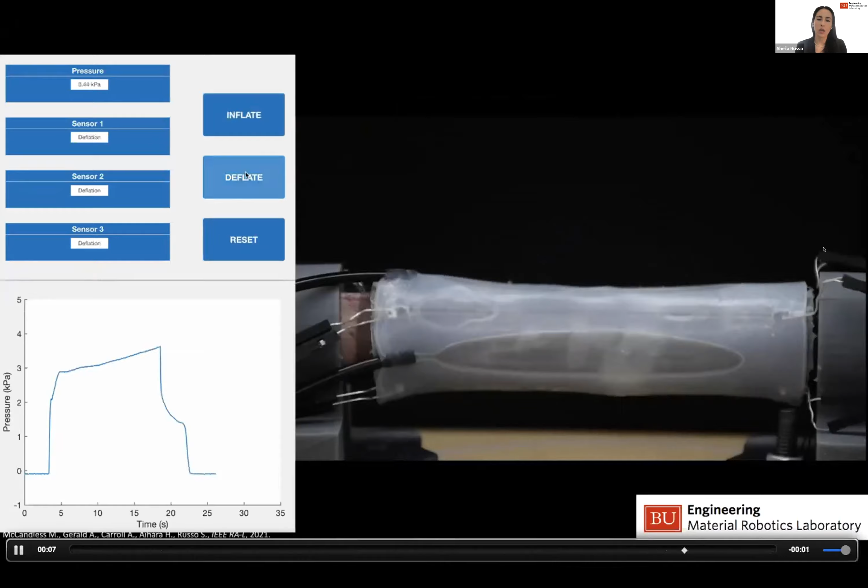Also, they can monitor the pressure inside the robotic actuators and the force that is monitored by the sensors. We have designed the system by using finite element analysis modeling.

So we have basically created a model of our robot in order to make sure that the deployment of those soft actuators would not interfere with the sensing, and making sure that the distribution within the skin of the robot, of those actuators and sensors, was properly designed.

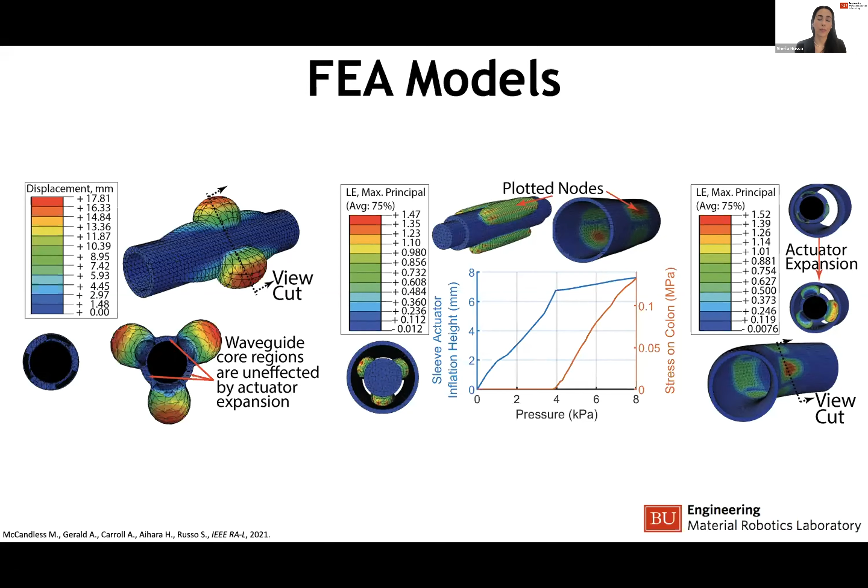And we also investigated how much force that soft robotic sleeve would impart onto the colon, and how these forces can be lowered down with our system with respect to a traditional colonoscope. This is just the way that the system is fabricated, the way that the robot is fabricated.

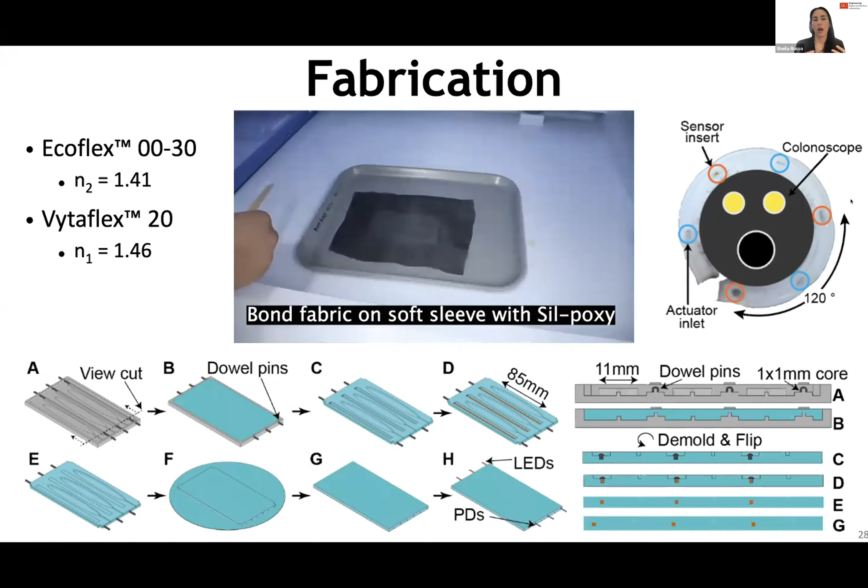As you can see, it's simple pouring and casting of silicone elastomers, and the soft optical sensors are embedded by simply injecting different materials that have different refractive indices, such that you can guide light through the soft robotic sleeve. This is particularly useful because there is no high voltage or high current in this sensing methodology, so it's completely safe to be used inside the human body.

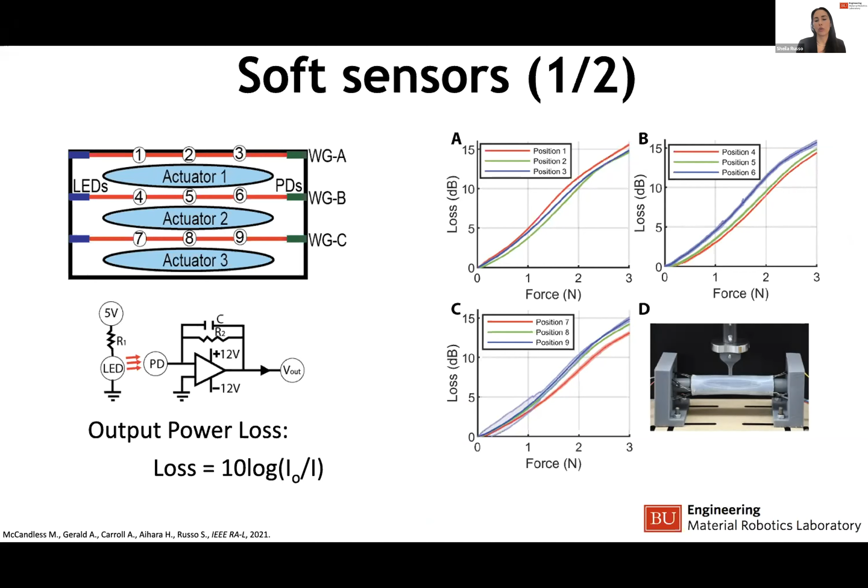We have calibrated our sensors, making sure that they responded specifically to the force inputs that we are interested in. As you can imagine, the sleeve is bending together with the colonoscope inside the colon. So we wanted to make sure our system was able to monitor only force interactions between the colonoscope and the colon, but potentially you could use it for bending sensing too, because it's responsive for that as well. So we calibrated the system and created an algorithm that would allow us to filter the inputs we're not interested in measuring.

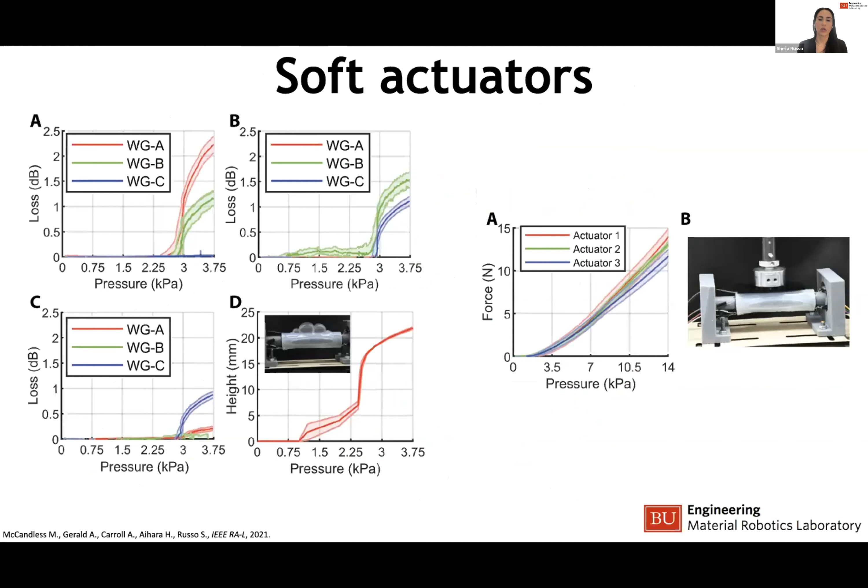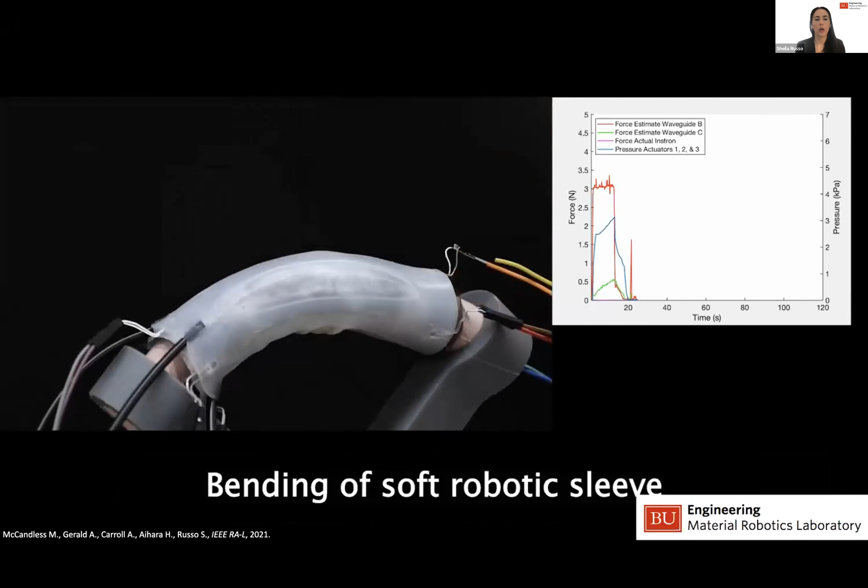We also characterized our soft actuators embedded in the sleeve to make sure they would be able to apply forces in the range necessary to provide easier navigation inside the colon. This is just a quick video to show you that the system is responsive to force inputs rather than bending.

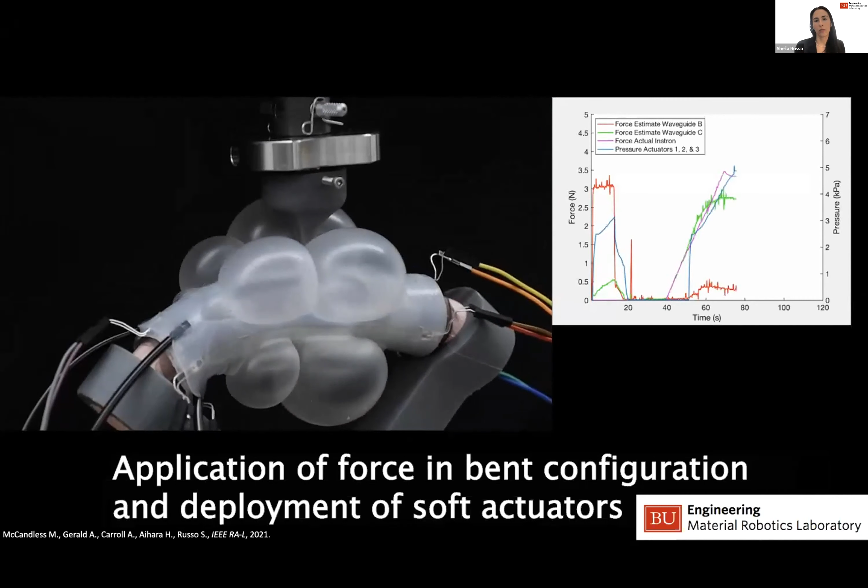You can see how it can pretty accurately estimate the force input that we are imparting on it. And this is an in vitro validation that we have done with a colon simulator.

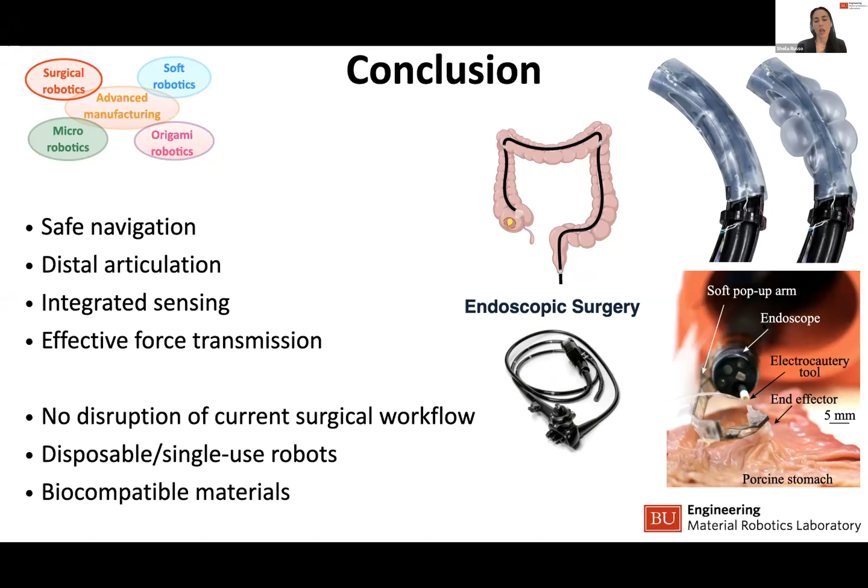Thank you very much, Sheila. Very interesting work, and this was definitely a great overview about it.

I think we also got a mixed question in our Q&A, highlighting the great panorama offered by your presentation. Definitely origami-inspired robotics seems to offer a very effective solution to complex manufacturing problems that we face in soft robotics, especially to increase repeatability. We all know that soft robotics started almost on the crafting side of our research, and getting repeatability there and being able to integrate reliably sensing elements is of paramount importance.

So in this context, I guess I can start with a question. How did you balance in your research distributing sensing elements with the real estate in your robotic system, and with vision-based sensing, which is obviously one of the main tools we use in surgical robotics?

Yeah, that's a really good question. We are actually working on some other systems that I wasn't able to show today because they're still under review, so stay tuned for that. We are embedding also vision sensing into these soft robots as well.

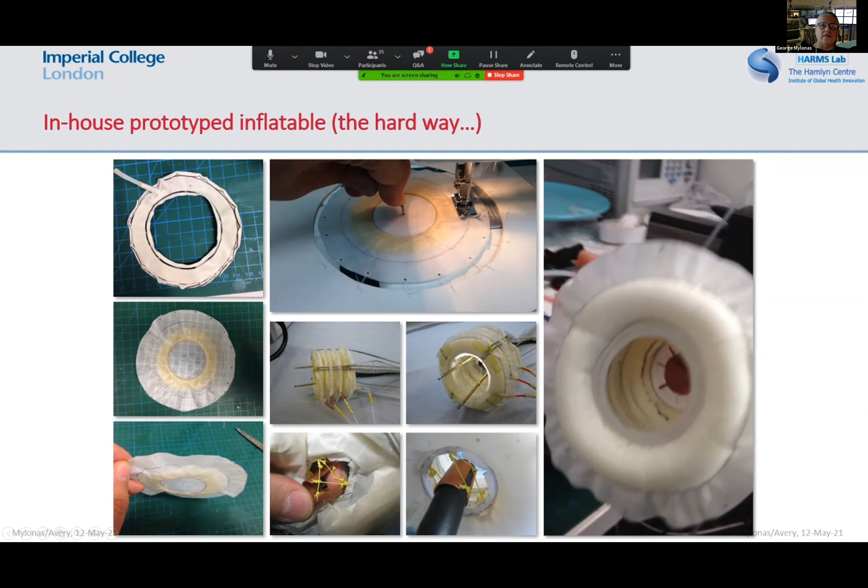So we can sew this, then remove the excess material and glue together these four different little components, like a donut-shaped inflatable component. This made it work, basically made the job.

This allowed us to move from this very first prototype, generation 1, to a system which gives bimanual dexterity to a flexible endoscope, as you can see on the bottom left, but is still rigid, and then allowed us to come up with a soft design which, when inflated, allows you to control the surgical instruments.

Here on the left, you see a grasper being controlled by this parallel manipulator, and on the right you can see the diathermy. You can see the bimanual dexterity offered by the system.

The amount of force you can exert with this kind of mechanism is phenomenal. We've been able to exert something like 70 Newtons inside the body in certain axes of the end effector. But the problem was that although we learned the hard way how to do some kind of soft robotics, this still wasn't enough.

This design was very big and really unreliable. When you inflate it, you use it for, I don't know, a couple of times, and then it's gone, it's burst. Because we wanted to perform animal trials, we wanted to go and try the system in a pig trial.

First of all, we didn't want to sacrifice an animal for nothing, just to go there and have the system not work or burst halfway through. Secondly, it was very expensive—something like £6,000 to do the animal trial at Northwick Park.

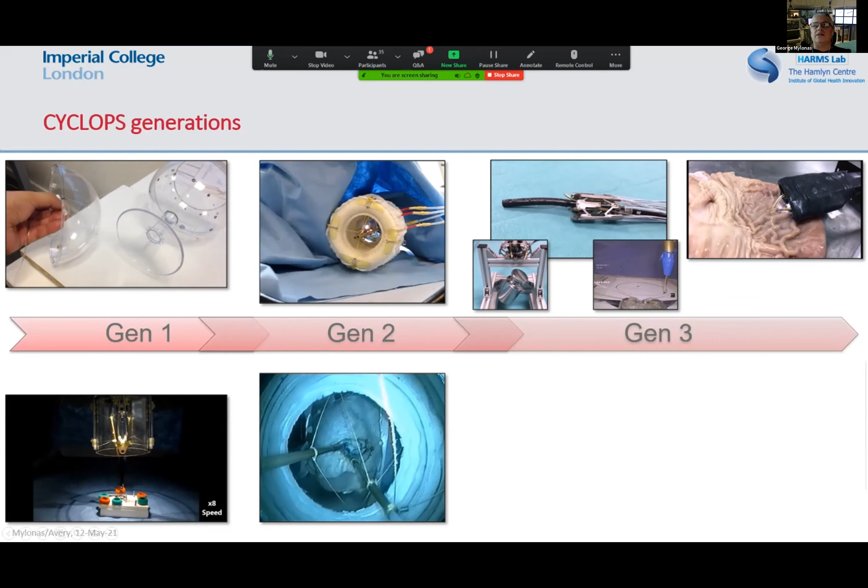So we came up with an intermediate solution just to prove the concept, the principle. On the top right you can see this deployable structure, but of course it's rigid, so it's by no means compatible with soft tissue.

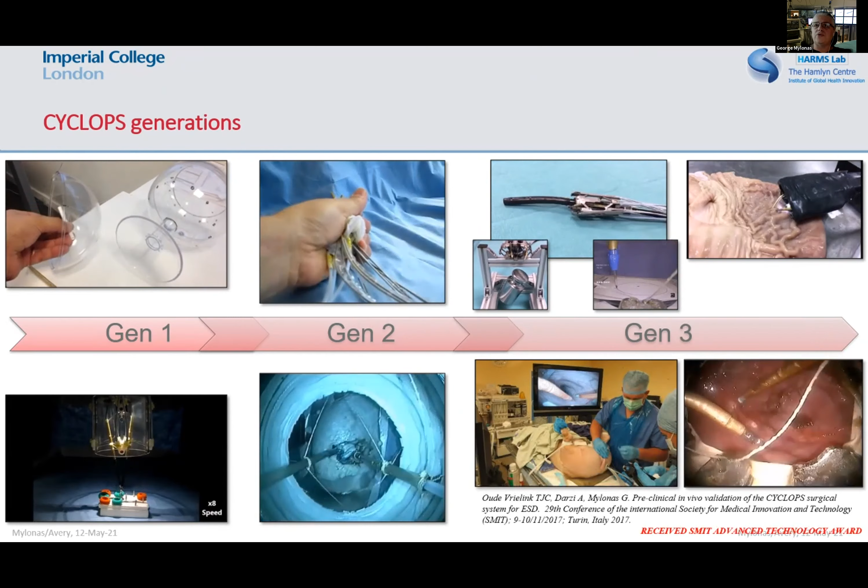Nevertheless, we were able to introduce it inside the body, inside the pig, to maintain pneumoperitoneum, and we did part of this ESD procedure, as you can see on the right.

Because we wanted to find an easier way to come up with our soft mechanisms, we thought of developing a system that would allow us to weld together several layers of plastic films. Mark Runciman, who's now writing up his PhD, came up with this nice robotic welding mechanism on the left.

Basically, with this you can take a layer of plastic—usually this is a sandwich of PE, PET, PE, because PE is a thermoplastic material and PET provides the strength of this film. When you heat it up, it melts, and then you can weld it with several other films. So you take this film and spray it with some infrared-absorbing liquid that heats up locally when you shine the laser through it.

This is an infrared laser at 25 watts, I think, a laser diode. Then you can make your shape—you design it in CAD. You can embed other mechanisms or components, like these electrodes for instance, and you'll see later why we embed electrodes inside this kind of component. Then we put another layer of plastic, laser weld it, and then another layer of plastic with a different shape. In this case, this is the actuation package over the sensing package.